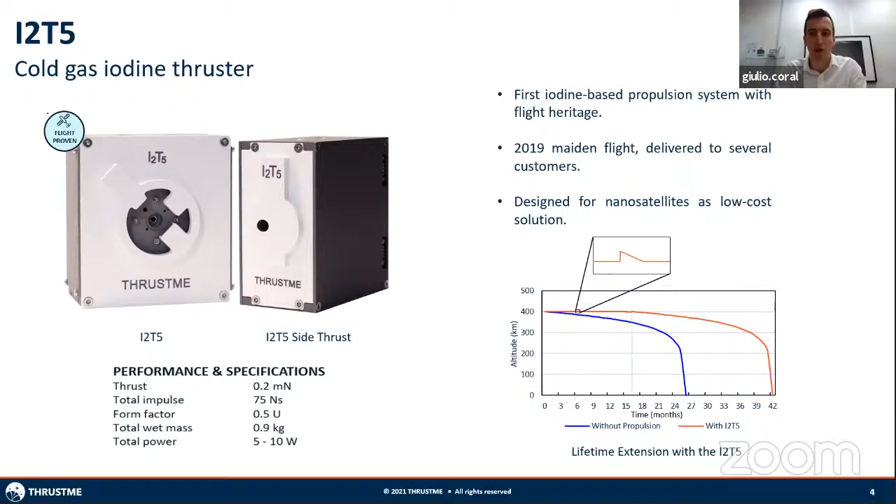You can see on the bottom right the difference between just leaving the satellite fall by itself and having a little bit of thrust from the I2T5. It extends the lifetime by several months.

Now, the product we are probably most famous for is the NPT30, specifically in the I2 version. This is an integrated gridded ion thruster system, meaning you have the ion thruster, the storage tank, and all the electronics in 1U or 1.5U. You just send the command to the thruster and it thrusts. This is also the first electric propulsion system using iodine ever demonstrated.

We've been flying a couple of them so far. Here's the performance—you can see we are on a totally different scale, several thousands of Newton-seconds. Depending on the version, it can be more or less, based on the tank.

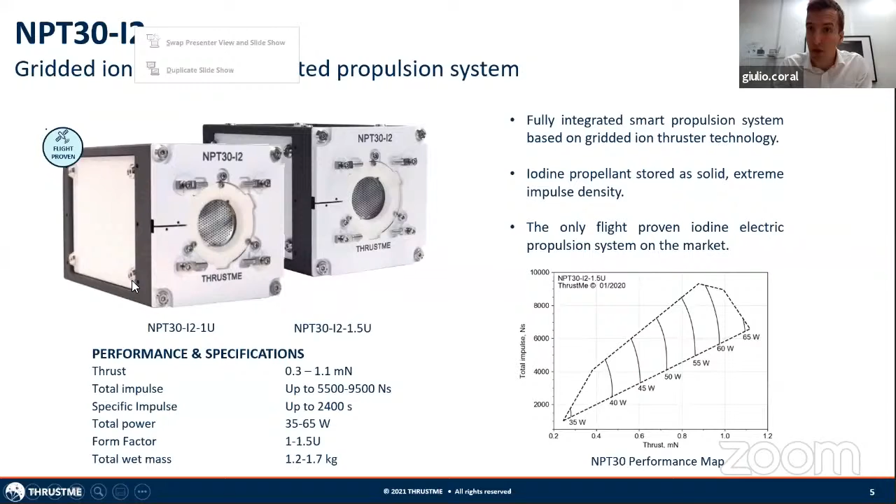This one offers especially—Jesus Christ, give me a second, I have the... there is some sort of automatic play. Okay, I'm going to try to fight the automatic play myself. One second, presenter view. I'm sorry, I'm going to try to get it to hold still. Okay.

So very high total impulse in a relatively compact format, which means even in a small volume you can deliver substantial performance. The performance curve is shown on the bottom right, so you can have different power levels and different combinations of thrust and total impulse.

This is one picture of the NPT30 operating on iodine. You may have often seen the beam of xenon, but iodine is a bit different—you have this yellow-colored ion beam that leaves the thruster. So yeah, the products we have flight-proven so far are the I2T5 and the NPT30 series.

You've probably seen in a previous presentation about the clustering of NPT30, which delivers higher thrust and total impulse for somewhat larger satellites. This one as well, ready and coming soon. A bit further down the future, the NPT300 series for small and medium satellites. So what I'm going to be talking about today is a new series of propulsion systems for advanced maneuvering capabilities, which can be used for a different series of maneuvers.

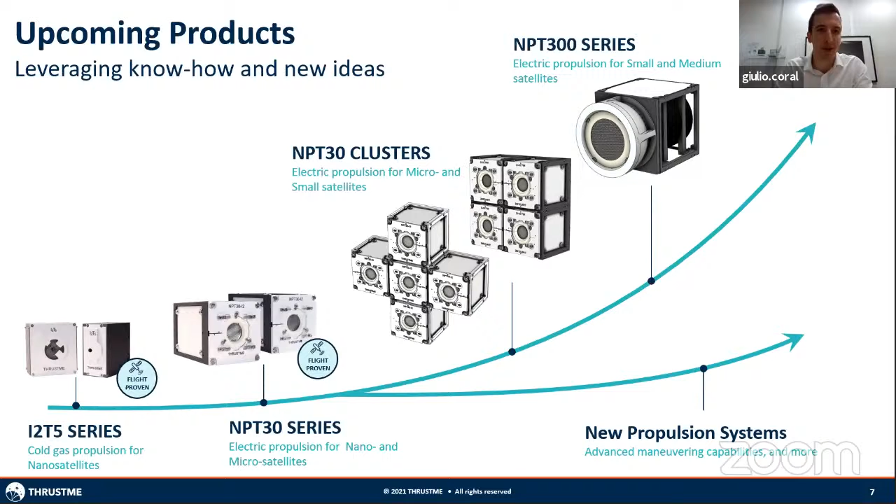Now, as the title suggested, we are going to be using water in this new project. So here is a bit of a comparison on why we like both iodine and water, although of course for different purposes.

Both of them can be stored unpressurized, iodine as solid and water as liquid. Both have high storage densities and can be delivered pre-filled to the customers. But iodine is very heavy, a very heavy atom, so it's great for electrostatic and electromagnetic thrusters. Water is a relatively light molecule, so it's great for electrothermal thrusters. It's basically about the way you accelerate it - you're probably familiar how it works. A lighter molecule delivers better performance for electrothermal thrusters. Better than this, there's of course hydrogen, but it has storage issues, let's say.

Now, how we go from a cold gas thruster to a hot steam thruster. Cold gas thruster is literally the most simple propulsion system one can imagine. You have a storage tank in which you normally have a pressurized gas, and a thruster. If you want to increase a bit the ISP, you add a resistor at the thruster, and if you want to prevent freezing trouble, you put a heater on the tank.

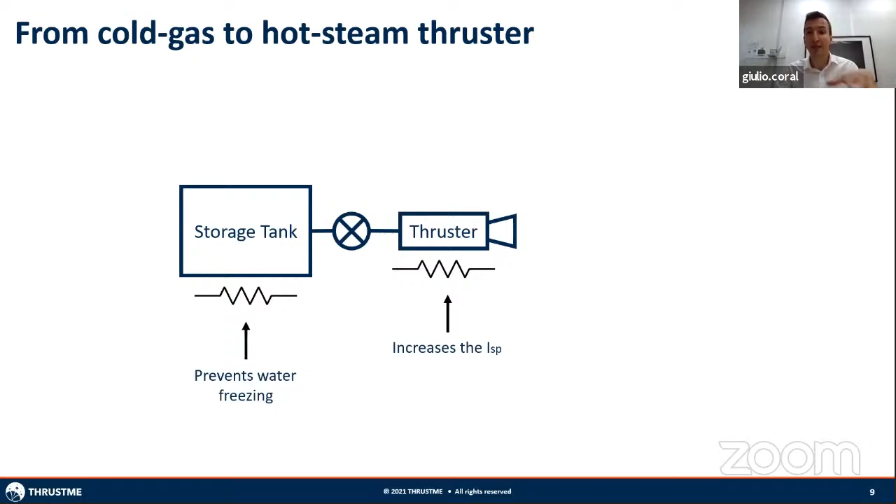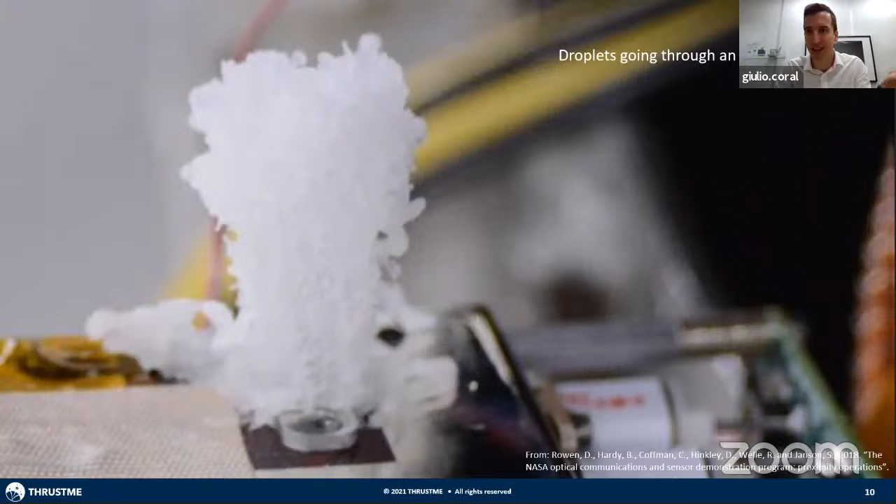Now, some people have tried to do this - it's been both at Surrey and at NASA. What happens if you just have a tank in which water is stored, and a thruster? You get droplets. So the thruster starts not only spraying water vapor, but also droplets. This reduces the ISP, plus droplets freeze because they go through a convergent-divergent nozzle, and by decreasing their temperature to increase the velocity, they freeze and form these ice cones. This caused several severe troubles, both for the Surrey mission and for the NASA one, in which they found that either they preload a lot less water, or they're going to have freezing, so they lose a lot of the propellant without generating any thrust.

Now, okay, we need to do a bit of modification to this because we've seen that approach doesn't work. So we add a separate storage tank in which we store water in a bladder, and then we inject a little bit of water in the vaporization tank. The water here is then vaporized, and then it's further heated in the thruster.

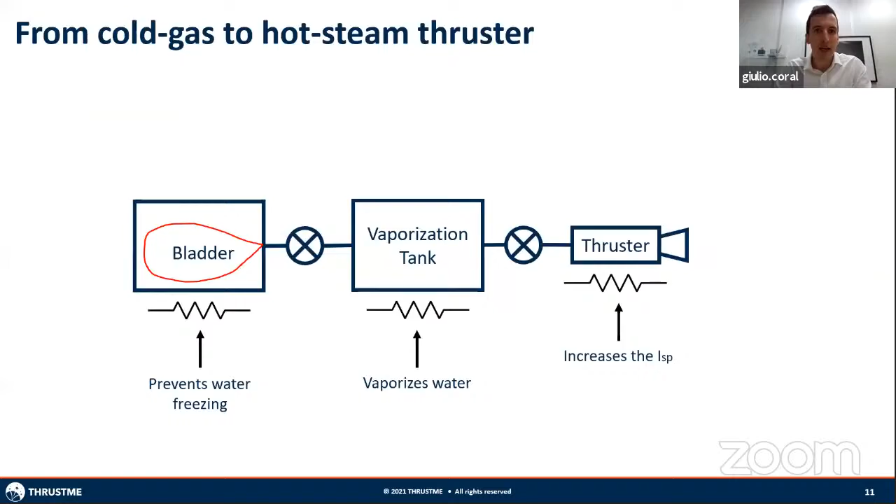So water vapor superheating is favorable for a series of reasons, but I'm going to talk about the ISP thrust-to-power ratio curve. This curve you are definitely familiar with is the relation between specific impulse and thrust-to-power ratio. We know the equation written here - the product between ISP and thrust-to-power ratio is fixed. So it gives us this curve, which means that in general, if I increase the temperature, I'm going to increase the specific impulse and reduce the thrust-to-power ratio.

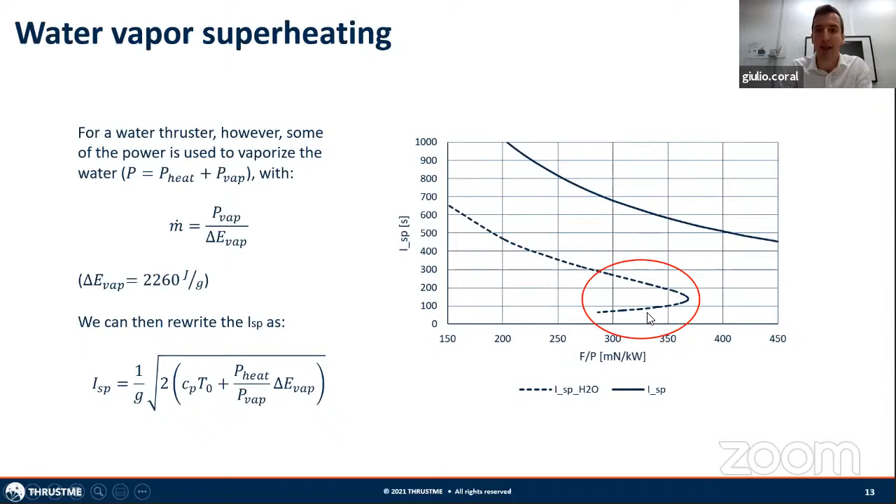For water propulsion systems, it's a bit different since not all the power goes into heating up the vapor - some of the power also goes into vaporizing the water from the beginning. So the mass flow here is determined by a portion of the power: m-dot equals P-vap over delta-E-vap, the vaporization energy. Now we can rewrite the ISP equation as this, and this leads us to this interesting curve, which shows that the general pattern for high temperatures is the same, but at low temperatures, if I increase the temperature, hence increasing the ISP, I also get a better thrust-to-power ratio.

This basically means that if I'm doing a water thruster, below 400 degrees, it's not even a trade-off. The higher the temperature, the better it is, no matter what. If I go above 400 degrees, I start losing thrust to power ratio, so at that point it becomes more of a standard electrothermal propulsion system.

Now we have this basic layout, we understand the fundamental theory. We want to start with the system design of this RCS system. We have a bladder vaporization tank and a set of thrusters. What we do here is study a schematic: how much space is each thruster going to take, how much space is each valve going to take, and how much space the vaporization tank is going to take.

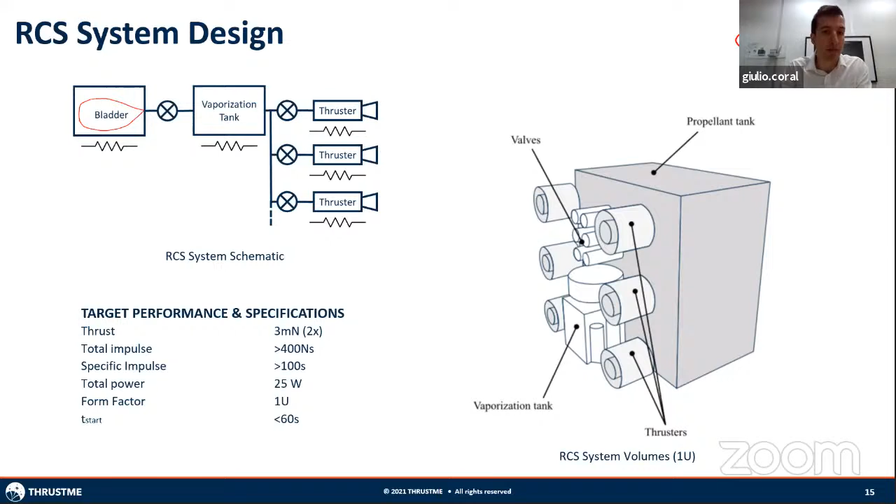We can have a rough idea with the ISP we are targeting from the theory of what performance we can get. Doing basic calculations with the previous theory and considering a typical power budget a new RCS system may have, we conclude we can deliver about 3 millinewtons of thrust per thruster with up to 2 firing at the same time. A total impulse in excess of 400 Newton seconds, delivered thanks to a specific impulse above 100 seconds, which is above anything there is in the industry for small nanosat RCS systems. This is provided with a total power of about 25 watts.

Now we have the system, let's start with the design of the thruster. What we're doing here is we put a heater at the center and then a channel typical for heating on the outside. The heater is a particularly high performance model that can hold very high temperatures, up to 10 watts on the single heater.

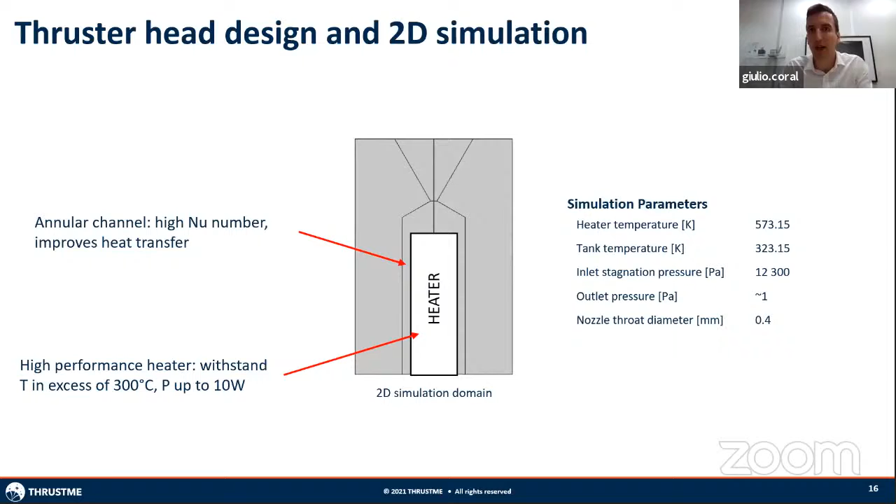The channel, we chose this layout - there are other options, but we chose the annular channel because of the high Nusselt numbers it delivers. We've been simulating it, starting with 2D simulations. The temperatures are shown on the right side. We start with the heater at 300 degrees and the inlet of water at 50 degrees Celsius.

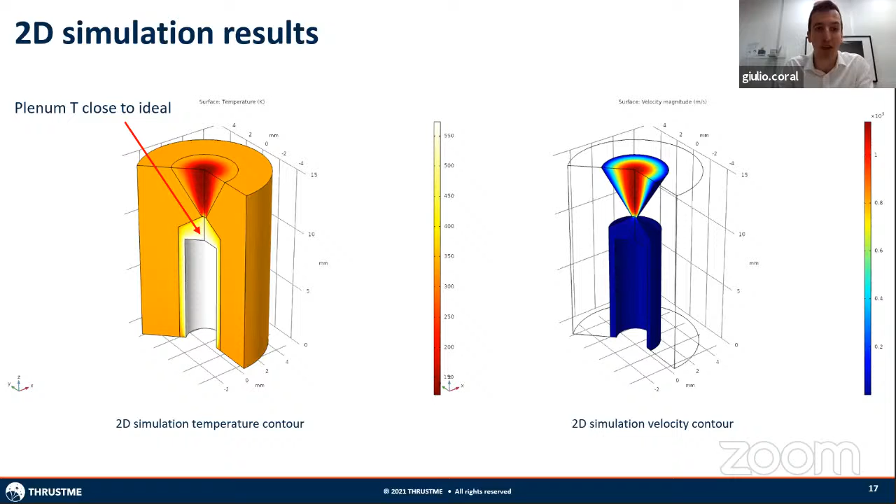An inlet stagnation pressure determined by the temperature of the water at the inlet of about 12 kilopascal. This is what we see, more or less. Here specifically, you can see the plenum temperature is very close to the ideal values. The Mach numbers are hard to see from this, but basically it means we can effectively heat water to the temperatures we are targeting.

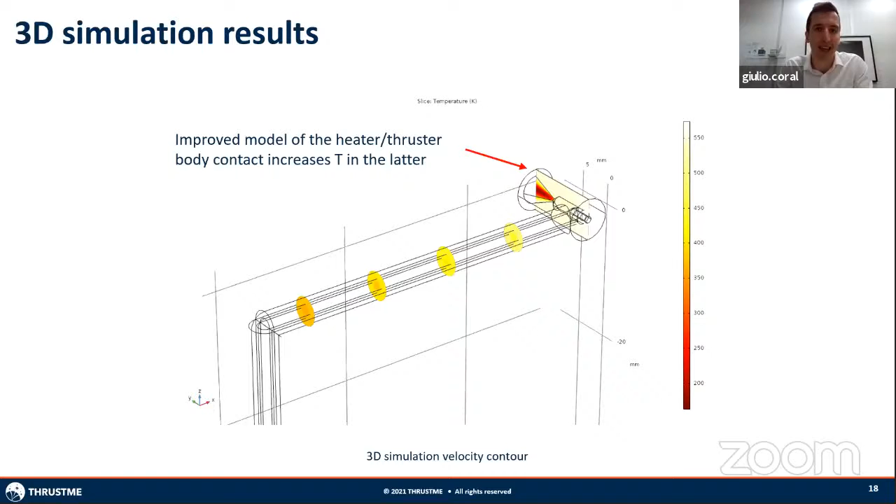A bit more in detail, we went on with 3D simulations. These have integrated the inlet pipe from which the water comes, and there's better contact modeling between the heater and the thruster. This shows that if we manage to hold the heater at 300 degrees Celsius, we can hold the water at the same temperature. So overall, the performance we've managed to simulate is very comparable to what the isentropic calculation, the basic theory I've shown before, gives us.

So overall, the conclusion from the 2D and 3D simulations is that an ISP in excess of 100 seconds is a realistic target. So we can deliver the performance we have studied before.

Now about water in the vaporization tank - how much water can I fit in the vaporization tank? If I just fit as much as I can with surface tension, putting a few droplets here and there, I'm not going to have droplets, but the thrust is going to go down very fast. The issue is the volume I can use is very limited, so the pressure depletes and the thrust starts going down, as you see in the bottom left figure.

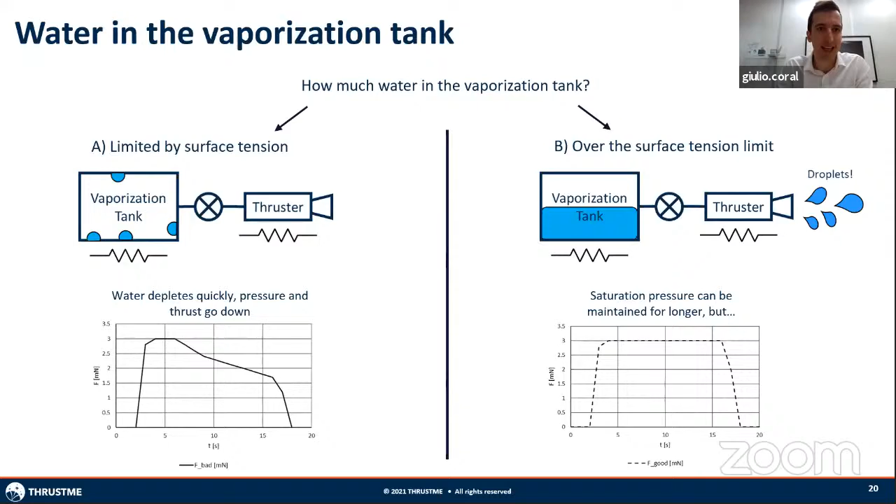If I fill more than the surface tension allows, I can in principle hold a nice thrust for a long time, but it's very likely I'm going to get droplets. Then the thrust is going to look like nothing like that - it's going to go crazy and then go to zero when the water freezes. So the solution we came up with is this, what we call an LSA, large surface area insert, which maximizes the amount of water I can store in the vaporization tank. Determining precisely how much water I can fit by simulation or analytically is kind of complicated.

So we decided to solve this with the bisection method. Basically, what we did is we placed the target in front of this, placed everything in the vacuum chamber, and started opening the valve to see if it releases droplets. And these are more or less the results: a series of tests starting with a lot of water, then a lot less, and then going by bisection.

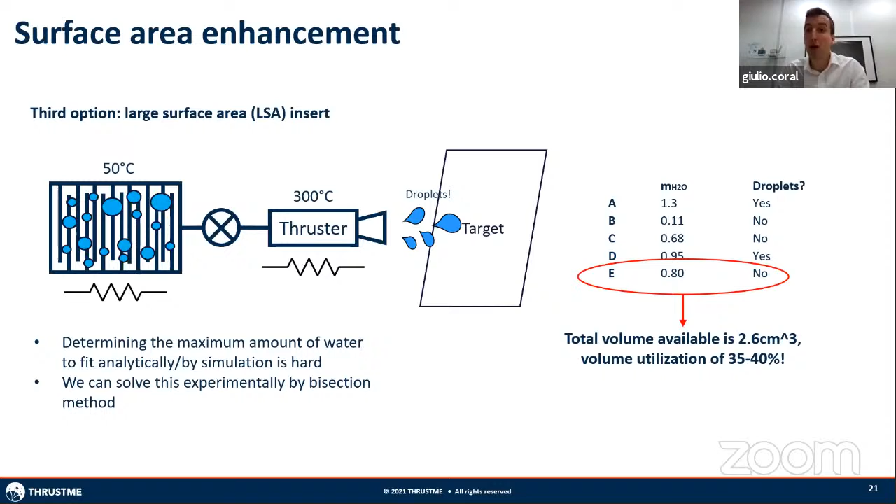We concluded that with about 35 to 40% of the volume filled with water, we can deliver zero droplets, which is then going to give us a stable thrust without losses due to the droplets themselves.

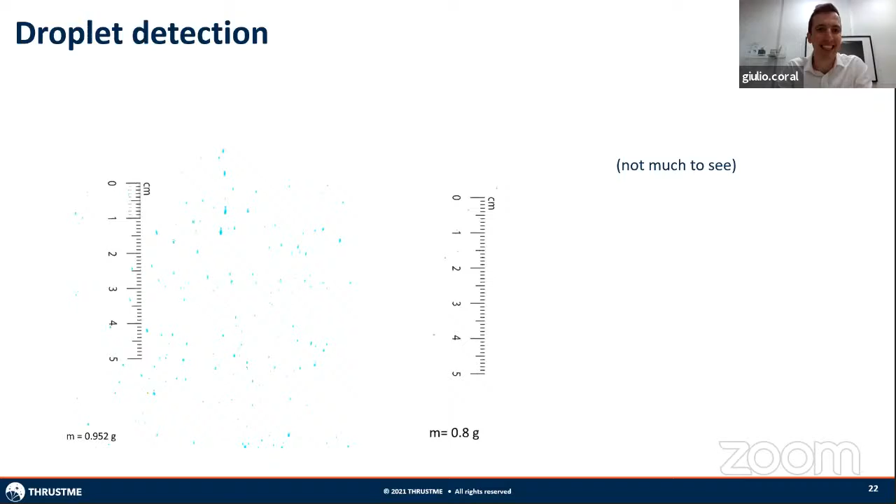Now, this is how we did the droplet detection. The target was basically a piece of paper which was then scanned. The water had some pigments which colored it blue. On the left side, you have one of the cases in which you have droplets, and you can clearly see them. On the right side, you have a case where no droplets are detected, and you cannot see that much. So next step, we need to minimize the heat losses.

This is particularly complex because the thrusters are at 300 degrees, while the vaporization tank is at 50. So the idea is using a bracket in which each thruster is mounted, which holds it to the vaporization chamber. So the little bit of heat I'm going to lose transfers to the vaporization chamber, which is then recycled to evaporate the liquid water, with no contact between the thrusters and the tank.

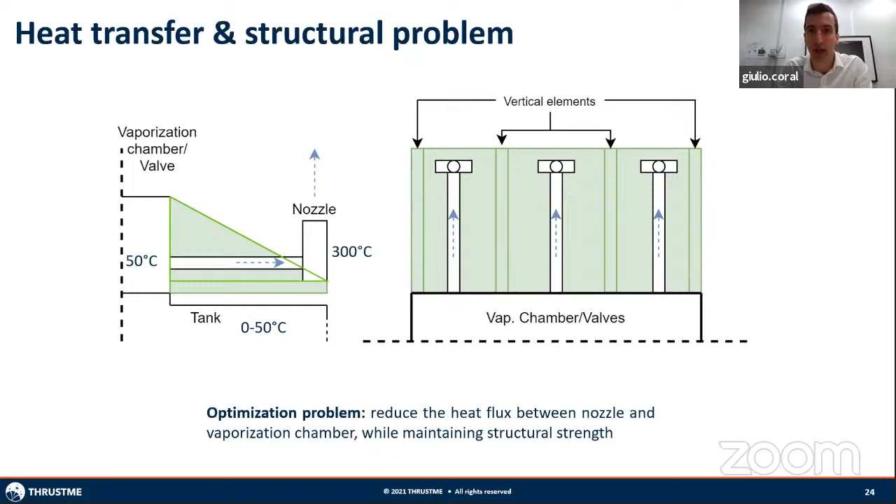Now this becomes an optimization problem. We want to reduce the heat flux between nozzle and vaporization chamber while maintaining sufficient structural strength, so the bracket and the whole system itself should survive the shocks and vibrations we see during launch. So we started with this design optimization process.

At the beginning, we tried to do it with kind of refined methods such as topology optimization or generative design, but it's somewhat complex from the point of view of introducing thermal conditions in these processes. So in the end, we started with this algorithm, done kind of by hand, starting with the fundamental drawings and then proceeding with little design iterations.

So in the end, for example, I can show you here on the left is the z-axis shock. This is the von Mises stresses on the bracket.

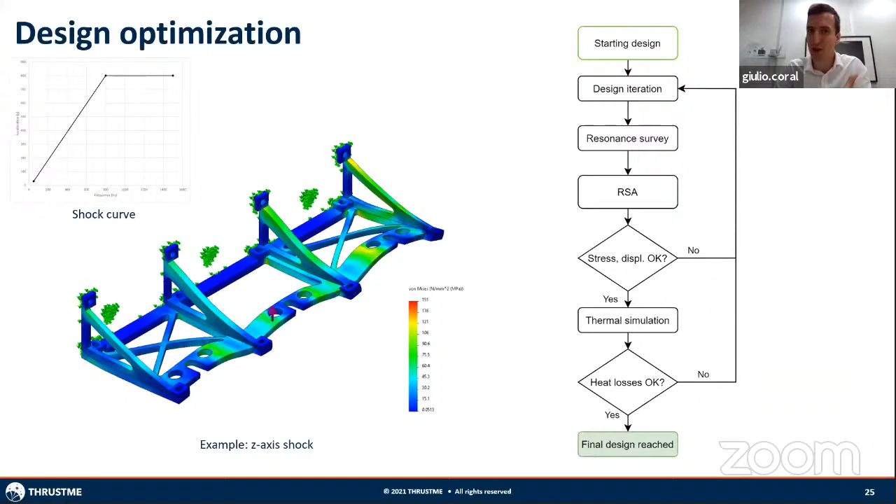You start by making a given design. You do the resonance survey for the shocks. You see if the stress is okay. Then, if it's okay, you do the thermal simulation. You see if the heat loss is okay. If any of this is not okay, you restart with a new design iteration until we get to a design that is satisfactory both for the thermal engineers and for the structural engineers.

So overall, I had to blank out the thrusters, but we end up with a design, as mentioned, that can have heat losses to the vaporization tank of less than 5 watts each side. We're going to have one of these brackets on each side, and it's designed to hold the shocks of launch, so no risk of structural failure.

Next, the thrust measurement experiment. On the top left, you can see more or less the measurement setup. We measure thrust, pressure, and temperature. We operate at the mentioned 50 degrees on the vaporization tank and 300 on the thruster, which gives us a 12.3 kilopascal vaporization pressure.

For this one specifically, we did a pulse duration of about 15 seconds with a duty cycle of 25%. On the top right, you can see the prototype. This is during a leak test, I believe, because during the thrust measurement, there was a bit too much stuff around.

On the bottom left, you can see we can deliver a greatly stable thrust. Over the single firing, the thrust is basically flat, which if you've seen comparable thrusters, they suffer a lot from this issue of the thrust going down very fast. The pressure drops a little during the thrust phase and then replenishes when we restart heating up.

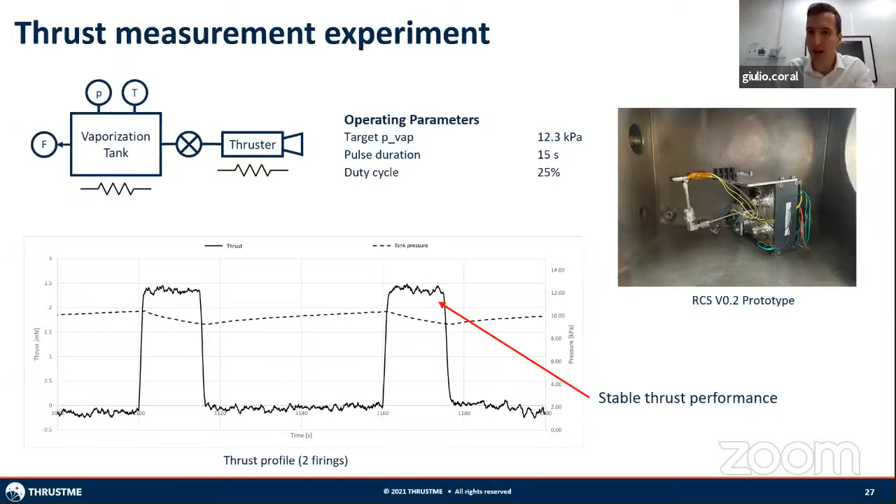But yeah, in general, stable thrust performance, which was one of our goals. This case specifically, we were running at about 2.5 millinewton, which as well is very close to the level we are targeting. The pressure, you can notice, is a bit lower than what we were targeting, and I'm explaining in the next slide what happened.

What's happening here is that yes, you heat up the tank, so you try to increase the pressure, but the temperature measured by the sensor may not be exactly the temperature of the water. It can be the temperature of certain parts, which overall means that you get a lower pressure. So the next step will be likely introducing a control loop on the pressure, which will guarantee us the exact thrust that we are targeting.

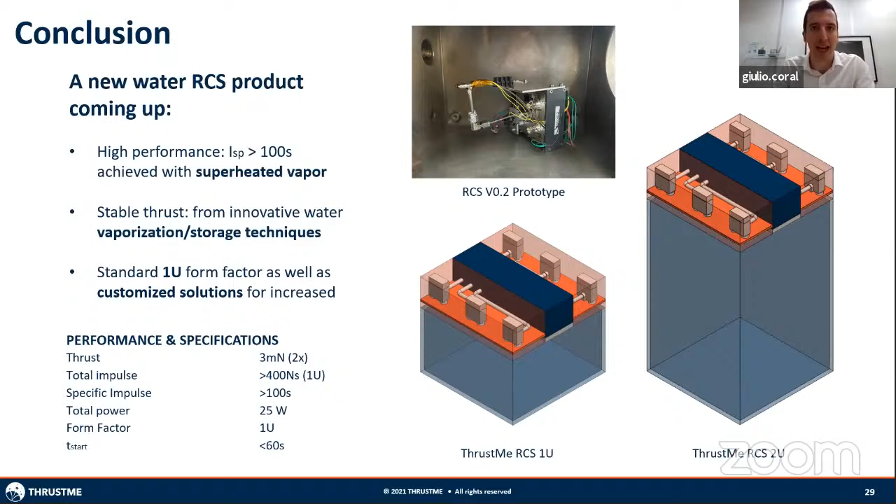Increasing the size, yeah, the tank, the storage, increasing the storage tank size is zero problem. Increasing the thrust can be as well done without major challenges, of course, depending on the interest of the customers.

I finished 5 minutes early, so thanks for your attention. And yeah, if you have any questions.

Thank you, Giulio, for this very interesting new concept of propulsion systems. So maybe now the paper is open for discussion. Yes. So maybe we can start with Stéphane.

Thank you, Laurent. Yeah, congrats, Giulio. This was really impressive, and I really like it, you know, because it started from theory until the product. This is really, really impressive. And congratulations to the whole ThrustMe team for this. Thank you. It's, yeah, exactly. It's a team effort, some of which are not mentioned. I must point out that there's a lot of people, especially the interns, who have worked on this, and they're not mentioned in the author list. So thanks to them, especially.

I have 2 questions, Giulio. The first one is about the iodine system. You know that Busek is also developing an iodine thruster, Hall effect thruster, and ion engine. Probably you know it. They never flew them. Busek, I'm not aware of them flying, or I'm aware that they are planning to fly, but I need to check the dates. I wouldn't even believe it's gonna happen this year. So yeah, from that point of view, we are still the only one who has flown.

For sure, you were the first, but I was wondering if other people have flown nowadays. The second one is about the water thruster. I don't really, from a customer viewpoint, although I'm not a customer, but what is exactly the advantage of this new water thruster compared to your cold gas thruster with iodine? Compared to the I2T5, yes. So overall, you've seen the I2T5 delivers 75 Newton seconds of total impulse. Of course, it's in half U, so we could in principle expand it.

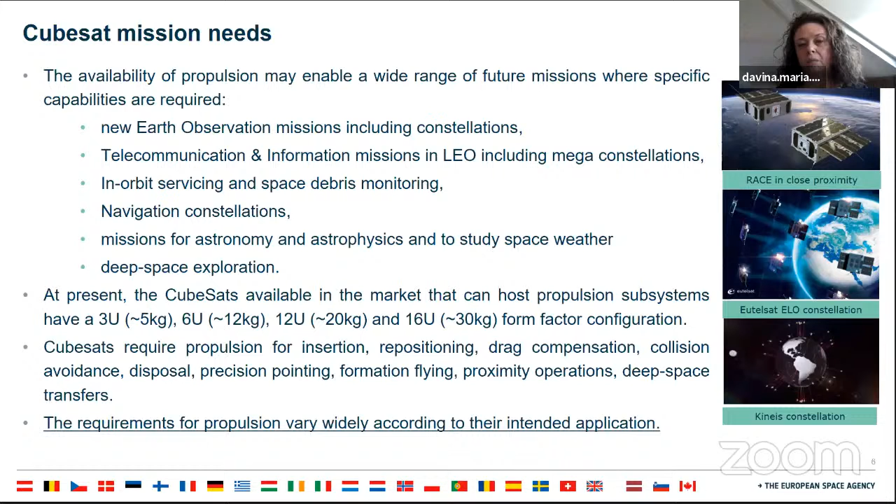We see CubeSats becoming bigger, as I said before. At the moment, we look up to 16U form factor, but this might change even in the future. And with all these different applications, there is no propulsion system that fits all, and the requirements really vary widely within the application according to the application.

We did a market study together with Euroconsult, and this is a bit of the outcome of that forecast: over 300 satellites with propulsion, with European propulsion, because this was targeting European product in the next 10 years. We see deorbiting and collision avoidance capability becoming a more and more hard requirement. And so in order to respond to that requirement, reliability is the word to keep in mind.

But we also see new missions coming, interplanetary. And for all that, we have identified that high delta V propulsion and 6 degrees of freedom propulsion is where we should really put attention on.

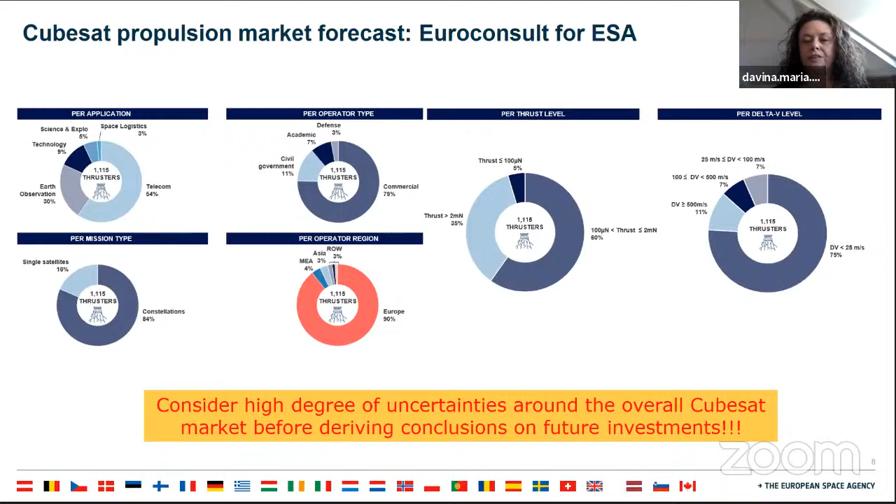This graph shows, again, one of the results of this study, which focused on the number of thrusters. But of course, I always keep saying we need to be very careful because this is a market assessment and the market is changing, it's got uncertainty. So, we see quite a lot of thrusters, and you can see there also the different thrust levels that will be required in the next 10 years.

Recently we are also including into this IOD mission set demonstrations of electric propulsion. I'll mention four of them which I think are quite interesting. One is M-ARGO. M-ARGO will be the first standalone deep space CubeSat that will rendezvous with a near Earth object, using a RIT 3.5 grid ion thruster from Mars Space to do the transfer to the near Earth object, but also a xenon-fed cold gas system, so it will be a hybrid system.

We have GOMX-5, which has got several experiments on board, including one of the iodine-fed NPT30 electric propulsion systems from ThrustMe to demonstrate large delta V in excess of 280 meters per second.

We have a lunar orbiter with FIP, which is also in definition phase. And we have another mission called Spectre, which at the moment has a trade-off open on electric propulsion, which plans to inspect large debris in LEO.

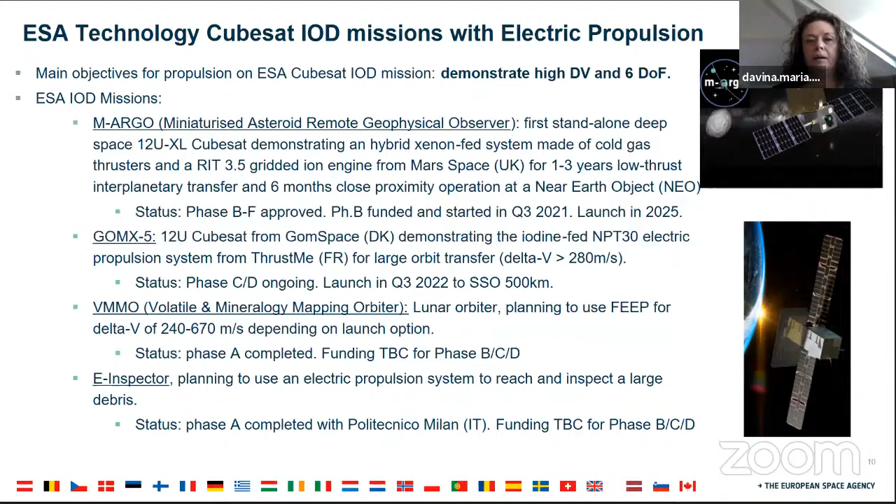At ESA, we also have several technology programs, and some of them are application driven. You can see there we have InCubed for Earth observation, CTP for science, ARTES for telecom, Expert for exploration, FLPP for launchers, and navigation is about to complete Egnos, but the new program is called NAVISP.

But then in my directorate, we have a technology development program which is independent from the application, so it spans all over the different applications, and they are divided into TDE and GSTP.

TDE, for those a bit more senior in the room who might remember the TRP in the past, has the objective to develop technologies which are at an early stage, so up to what we call a TRL maturity of 4 - breadboard prototype demonstrating in a representative environment. These are open calls, so you see ITTs coming out throughout the year with new requests for proposals to European industry and research centers.

And then we have GSTP, which are instead optional programs, and they take the products that are sometimes developed in TDE, sometimes developed through other means, but the objective is to take them to a high level of maturity, even into in-orbit demonstration with small satellites.

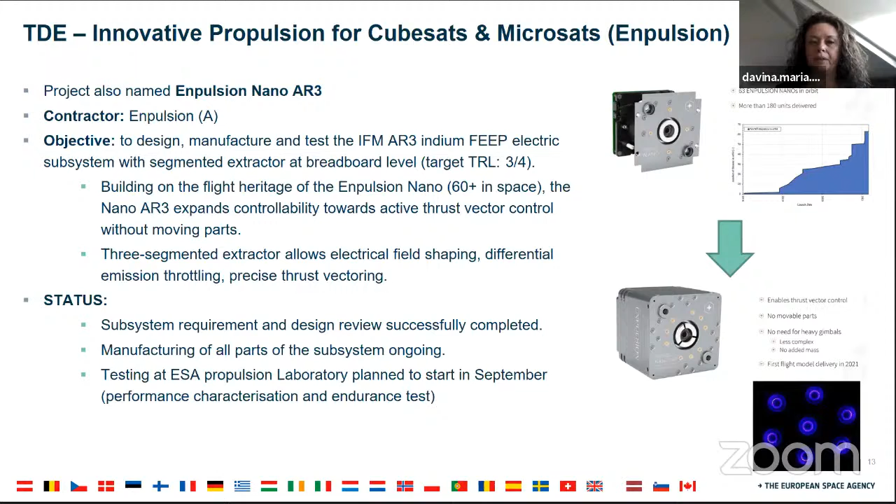T4I before has already completed the requirement and design definition, and they are at the moment in the prototyping phase. Enpulsion also, they are at the moment completing the assembly phase. In fact, the plan is that they're coming to ESTEC in the next two weeks for starting the test at our laboratory, and this involves performance characterization and endurance.

We also have a contract with ExoTrail that also targets upgrade of the nano system, which is also flight. The objective here is to extend the life by modifying some part of the thruster in order to extend the life up to 5 kNs. They are at the moment completing the design and definition phase, and as soon as they enter prototyping, they're planning to come to ESTEC for testing by the end of the year.

The final one we have also in parallel, so we have four electric propulsion activities in parallel, is with University of Southampton, and they are building the first all-printed VAT propulsion system. This is quite innovative, in my opinion, because everything is on a sticker, and I think there is a talk tomorrow about this more.

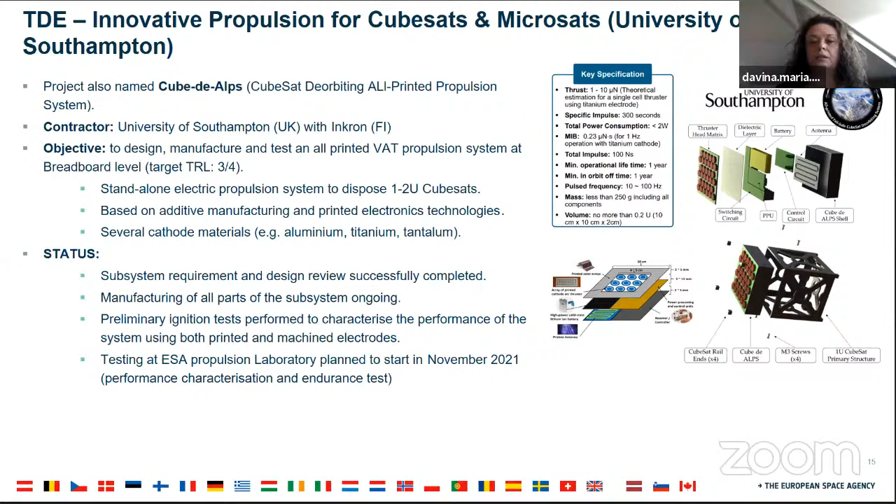So where we are also with this, we have completed the requirement definition phase. They are at the moment doing some tests at component level, and the plan is also that they're coming to ESTEC for performance characterization and endurance test by the end of this year.

We have several GSTP activities, this is more for higher, more mature development. The first one is with ExoTrail on the ExoMG microthruster, and this is involving the full qualification with a CDR planned already for beginning of next year. We also have a series of activities on the propulsion system for M-ARGO, on the development and qualification of the thruster, neutralizer, but also the entire propulsion system.

We also have an internal activity. This is targeting, for example, for what concerns the RIT, the validation of the life model, through tests like endurance test.

We are also running the harmonization process, and the harmonization on CubeSat propulsion is the first time we actually do it. And there is a reason, of course, because there is a lot of interest on this technology. The idea of the harmonization is to try to get an idea of the status of the technology in Europe in order to build the roadmap.

The harmonization of CubeSat propulsion includes chemical and electric propulsion systems for CubeSats up to 16U. We have put a target on the thrust level. Mainly this is really applicable to the chemical thruster, but we also include all the propulsion technology which does not follow the ECSS, but they are targeting missions where a bit higher risk is allowed.

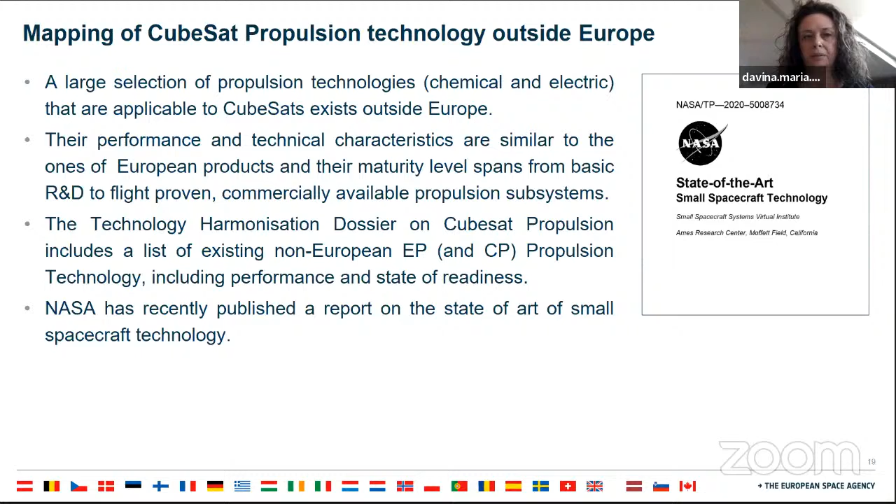We're also looking at the mapping outside Europe, and we've done a bit of research to understand how European technology fits into the worldwide market. In the meantime, also NASA, as perhaps most of you know, has released a document on the state of the art of technology, which I suggest everybody have a look at. It's available on the web.

So then you will see the roadmap when it is published, divided into different aims, as we call it, for an overall proposal of 72 new activities and a budget of almost 30 million. We have a standard at ESA, ECSS, but we also have a particular tailored version of the ECSS for CubeSat, in particular the ECSS-E engineering standard.

We work on a light approach for what concerns product and quality assurance, with emphasis on verification control, traceability, cleanliness, and risk mitigation.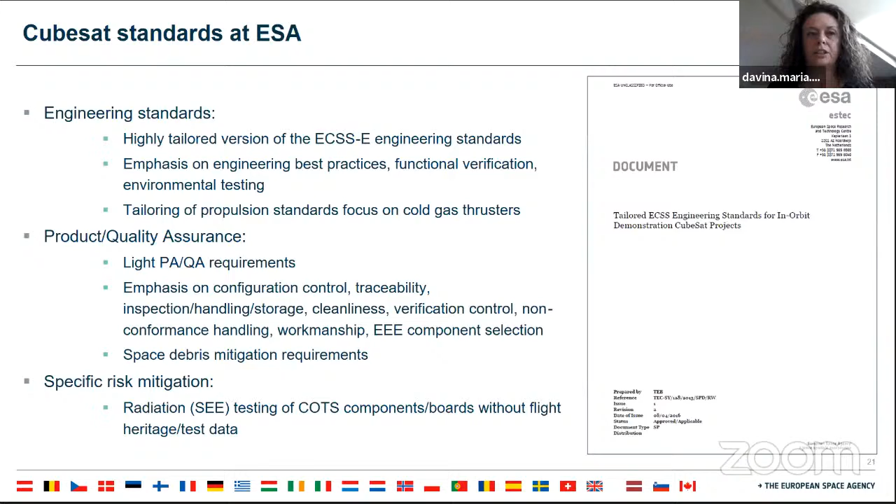But there is no specific standard for propulsion, as I say. So we have started working internally at ESA with a team of experts from chemical and electric propulsion, and started this exercise of tailoring existing propulsion standards: propulsion general, liquid electric propulsion for spacecraft, and testing.

We tried to reduce the number of requirements that you can see are quite impressive, but we're trying to reduce and tailor it to the application, whether it's a CubeSat meant for educational demonstration purpose or a commercial operational CubeSat. Keep in mind always that the technology targets low cost and fast time to market, but also considering the safety of the product.

We also started working on drafting a guideline and handbook, mainly for verification, trying to indicate the minimum level of verification that we believe are still important to carry out on ground. And with a list of minimum set of documents, we know ECSS can be quite heavy on documentation, so we tried to really stick to the minimum of what documents are necessary and what content of each document is necessary.

We also put there a bit of a trade-off on what to do. Endurance tests, life tests - this is a big question mark. We believe there are certain criteria listed that help deciding if an endurance test is sufficient or if a full life test is required. That depends on the qualification status, number and level of tests performed on ground, flight heritage, the maturity of the technology, if an accelerated test can be done, but also cost and programmatic aspects to be considered.

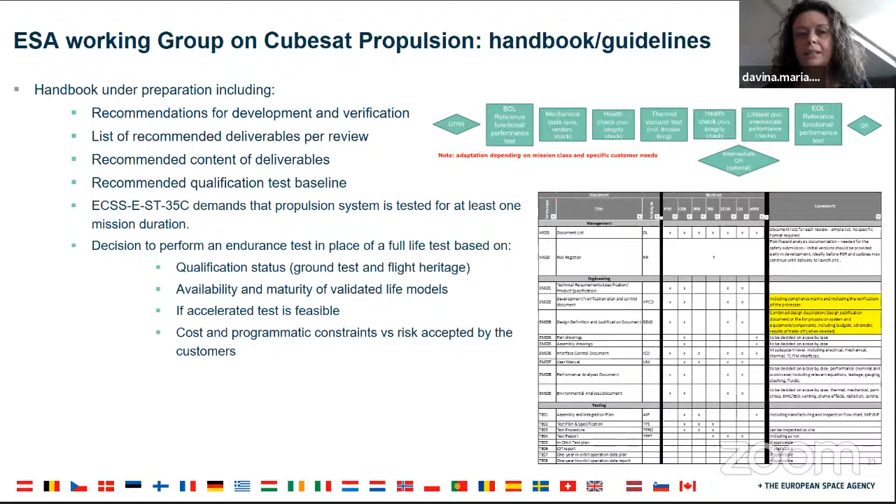Just very quickly on the plan that we have to upgrade the Davina, five minutes. Yes, five minutes please. I think I will be in the three minutes.

For those who don't know, we already have 7 chambers at ESTEC in the Netherlands. They are already suitable for testing CubeSat propulsion, perhaps not the one operating with iodine yet. So what we are doing now is we have submitted an internal plan to upgrade this laboratory with an incremental methodology, so we will deploy certain services in the next years.

The first would be to upgrade one of the facilities into TVT tests, so that we could perform an end-to-end test of the entire CubeSat satellite with the electric propulsion on board and the electric propulsion firing - the firing TVT test.

We have also planned to upgrade one facility to offer EMC/EMI test, because we believe this is quite important too, and also plan to upgrade the diagnostic and thrust measurement equipment in order to serve the market at the best. In the long term, we also look at perhaps including a solar simulator.

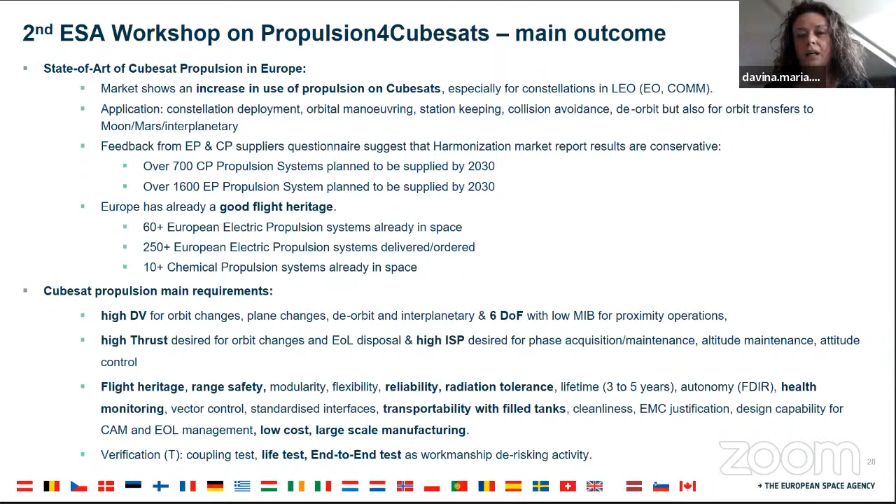We have highlighted the main requirements customers want: high delta V, 6 degrees of freedom, but also reliability. Safety is very important, and life tests and end-to-end tests are really considered important by the customer, as is workmanship and de-risking activity.

We asked a few questions during that workshop about whether the ECSS standards are still in use, and in fact the answer is yes. Companies still use ECSS, but they would like to have a dedicated one, and also a handbook. It is very welcome.

We also asked if our plan of building this test center at ESTEC is of interest for industry and research centers, and the answer was yes. The number shown there is not the number of people that voted, but the number of organizations - we try to only count one vote per affiliation. So it's really interesting to see that high number of companies responded yes to our question.

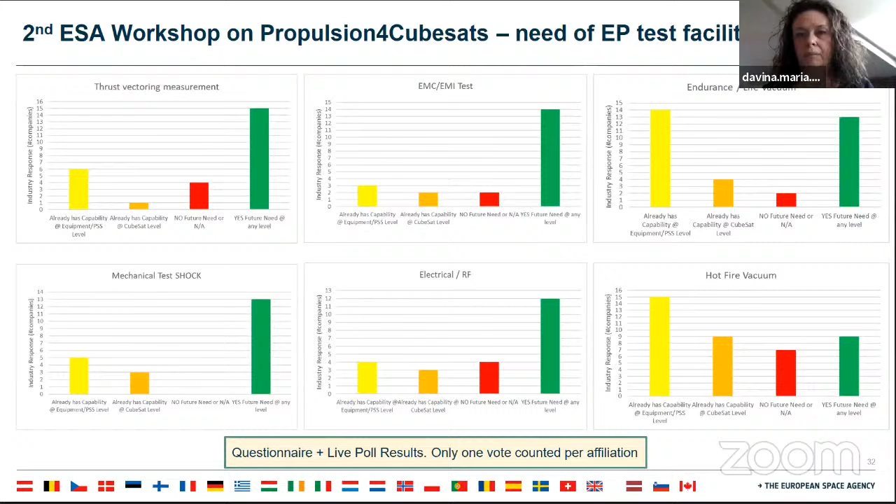And also this slide gives a bit of a view of what industry or research centers see needed for the future in terms of test capability. Thrust vectoring measurement, EMC/EMI test, endurance life test is the main interest.

With this, I conclude. I hope I gave you a bit of an overview of what is the ESA technology strategy and the ESA vision on CubeSat propulsion, and also a view of what we are working on in the frame of the harmonization process: the mapping, survey of the mission need, the market forecast, and roadmap. Also showed you some of the IOD missions with electric propulsion - I only included the ones with electric propulsion - and gave you some information on the running activity we are doing, and on the result of the working group on the ECSS engineering, tailoring and guideline, and a bit of the conclusion of the workshop that we had early this year.

So at the moment, after assessing all the propulsion systems for CubeSat, and after discussing with national agencies and industry through workshops, conferences, and also direct contact, we are working on the creation of an independent test center for CubeSat propulsion within the ESA Propulsion Laboratory. And I think I can conclude here, and I'll take any questions.

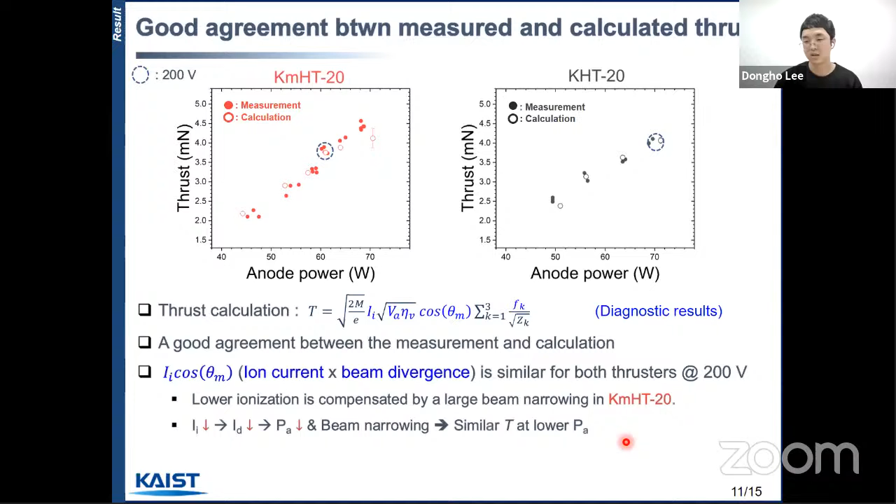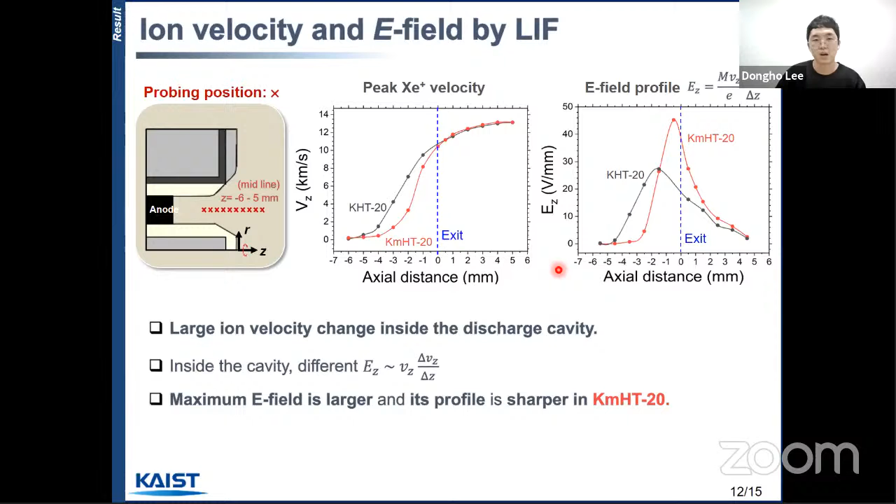This kind of dark gap is also found in several magnetically shielded Hall thrusters before, so we believe this is a similar phenomenon here.

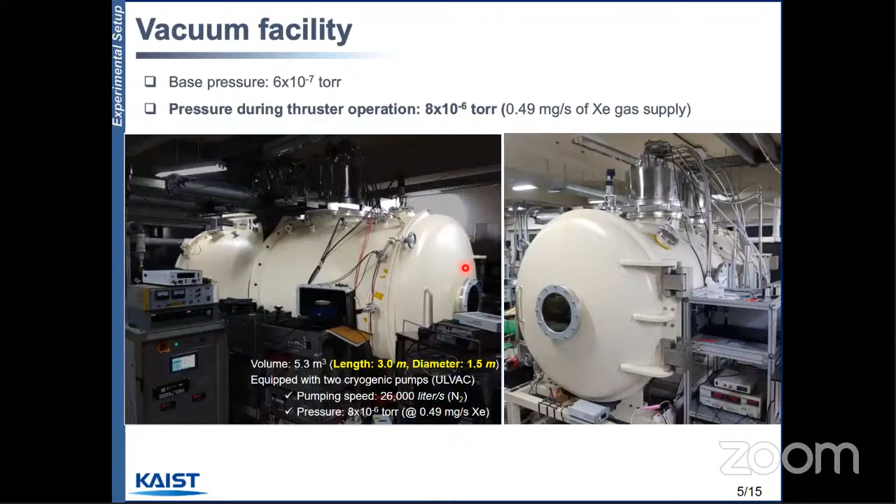I see you have some simulation from your group presented the next day. Do you have any insights from the simulation that you can share now?

Yes, actually we have studied this kind of mode change and what really happens during the mode change in our first paper. Consequently, we found a large localization of acceleration and ionization during this mode change, along with large beam narrowing and electron confinement. So we do not have concrete numerical evidence yet, but we think these differences in acceleration profiles led to the large enhancement of thrust.

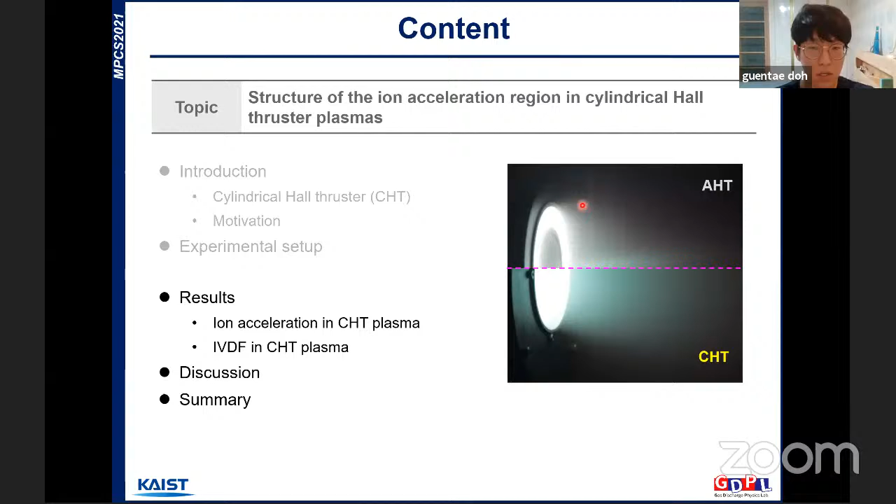Now let's see the results.

This figure highlights the different ion acceleration between AHT and CHT, shown here as an ion energy profile. As other studies have shown, AHT showed a narrow ion acceleration region about 10 millimeters near the channel exit. But CHT showed that the ion acceleration front stays at minus 15 millimeters, very deep inside, and saturates at about 70 millimeters outside the discharge channel. So the ion acceleration region is significantly extended in CHT plasmas.

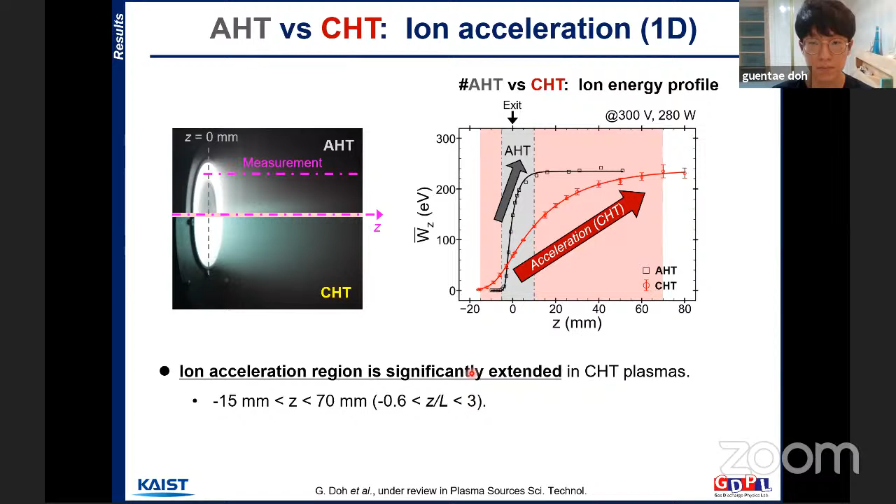This is the 2D IVDF measurement in CHT plasma. Squares are measured points; the color map indicates the summation of axial energy and radial energy. Arrows are ion velocity vectors, and yellow dashed curves illustrate the ion trajectories. We can see that as the radial position increases, the ion divergence also increases.

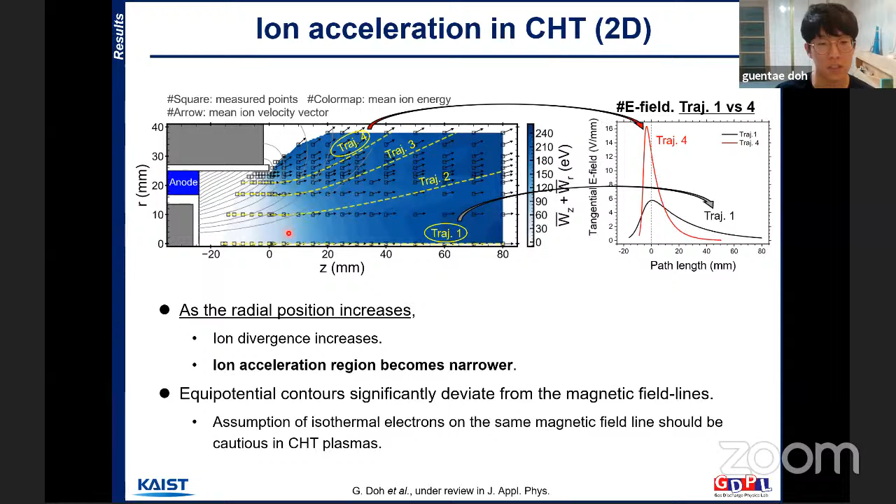From now on, I will talk about the IVDF at different axial positions. We can see that inside the discharge channel, the IVDF can be represented as a single Gaussian function, but during acceleration it becomes significantly asymmetric and can be represented as a double Gaussian function. This double Gaussian worked very well at other positions, so we suggest a fast and slow ion group in CHT plasma.

This is the fraction of slow and fast ion groups, indicating the area in the IVDF, and this is the ion temperature of the two groups. We can see that the fraction and ion temperature of the fast group significantly increase in this gray shaded region, and this corresponds to the region where the ion energy increase is very large. So we think the cause of this asymmetry should be significant in this region.

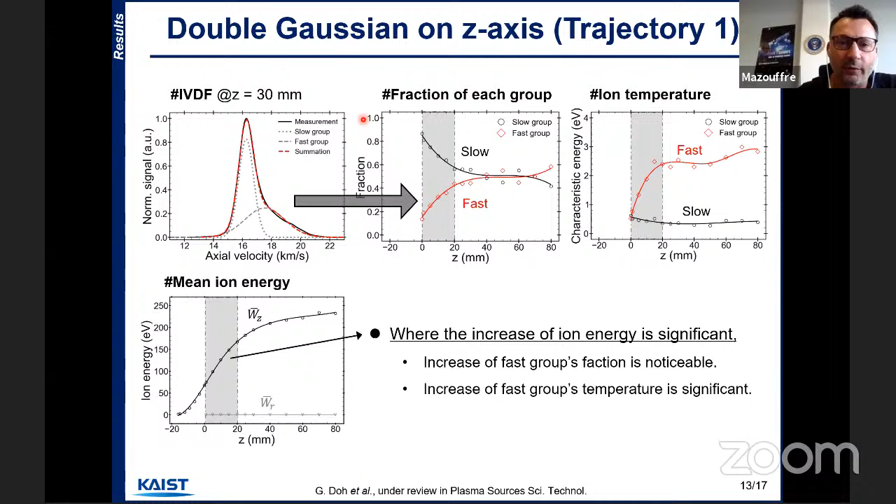Yeah, well, I'm not sure about this. I can just suggest possible candidates. I think one thing is about the 100 kilohertz ionic instability, because some PIC simulations showed that very low velocity ions occur due to that instability. I also think that charge exchange collisions could be the reason why these appear.

And in your explanation just before the conclusion, you were mentioning two possibilities or explanations: ion transit time oscillation and two-stream instability. Do you know how we could experimentally distinguish between the two possibilities? Is there a way to really distinguish between the two and better understand which one is at the origin of the distribution function you see?

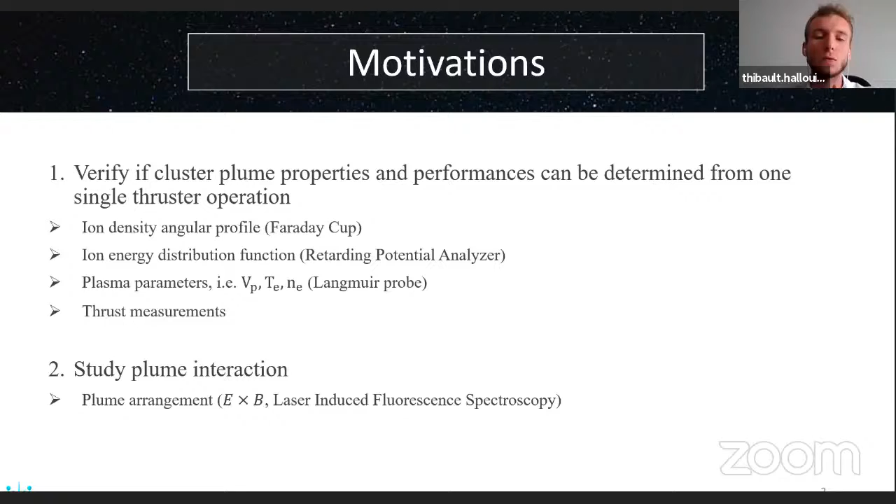So for now in this presentation, I will present you the experimental setup, but also the two diagnostics, basically the Faraday cup and the retarding potential analyzer, which give good information concerning the total ion current and the ion energy distribution function.

Concerning the thruster that was used, it's an experimental model, the ISCT 100 V2 developed here in the ICARE laboratory. It's an experimental model, so there are some differences with a flight model. Basically, the gas injector is a ceramic, made of mullite, a porous ceramic. The anode is just a ring in the discharge channel, and the magnetic field is generated by permanent magnets. The channel wall material is made of BN-SiO2.

Xenon was used as propellant gas for both the cathode and the anodes. An external 1-ampere class LaB6 hollow cathode was used. At the beginning, we were supposed to use 1 cathode per anode block, but the problem is that we had some trouble with one of these cathodes, so we didn't have the choice but to use only 1 cathode shared for the 2 anode blocks. Concerning the cathode, the CRP was kept around -10 volts by keeping a constant heating power on it, so that we limit the influence of the cathode operation on the plasma plume properties.

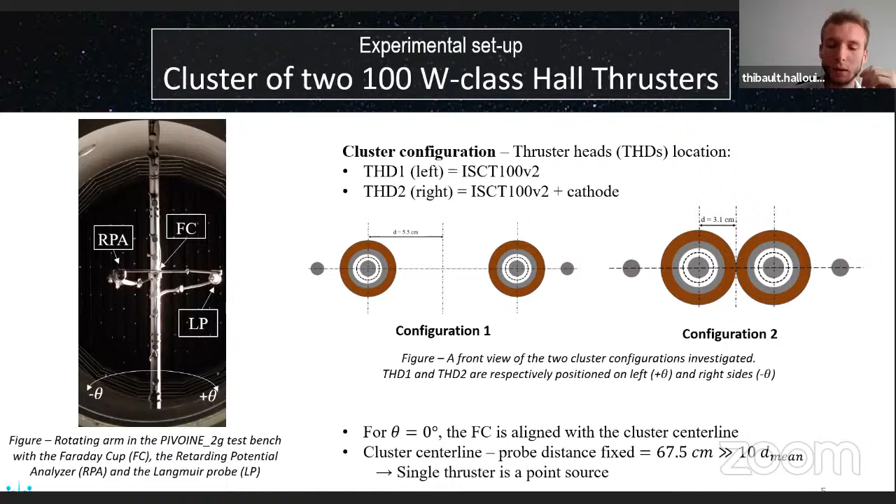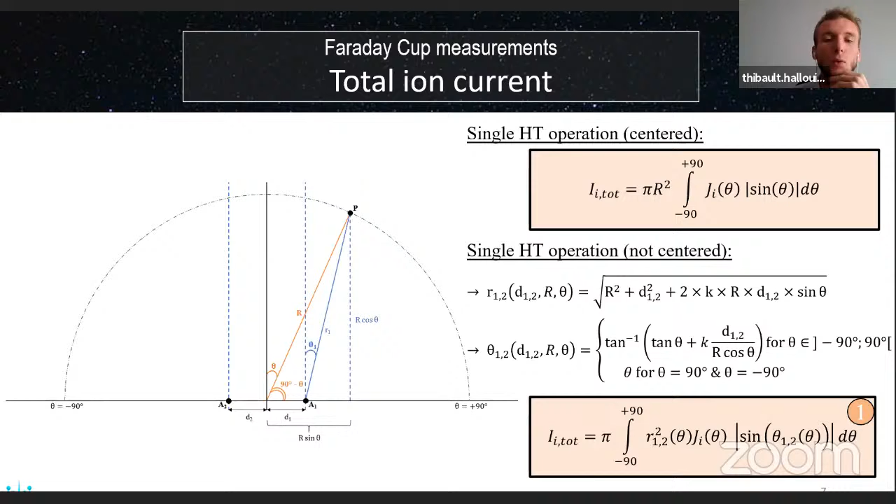From this plot, we can compute the total ion current. This is the formula we apply for a single Hall thruster operation centered with the Faraday cup at the 0 degree position. But here we are not aligned at the 0 degree position, so we have to take that into account. We apply Formula 1, which accounts for the fact that the distance between the anode and the Faraday cup varies with the angle, using some trigonometric tricks. This concerns the computation of a single Hall thruster operation when it is not centered.

To compute the total ion current for a cluster operation, we cannot apply the previous formula directly. We have to adapt it, because in a cluster operation, when you collect current in the Faraday cup, you don't know which source in the plasma it comes from, since two thrusters are operating at the same time. The only way to account for this is to apply a correction factor, which takes into account that the distance between the Faraday cup and each anode block varies with the angular position. I will call this Formula 2.

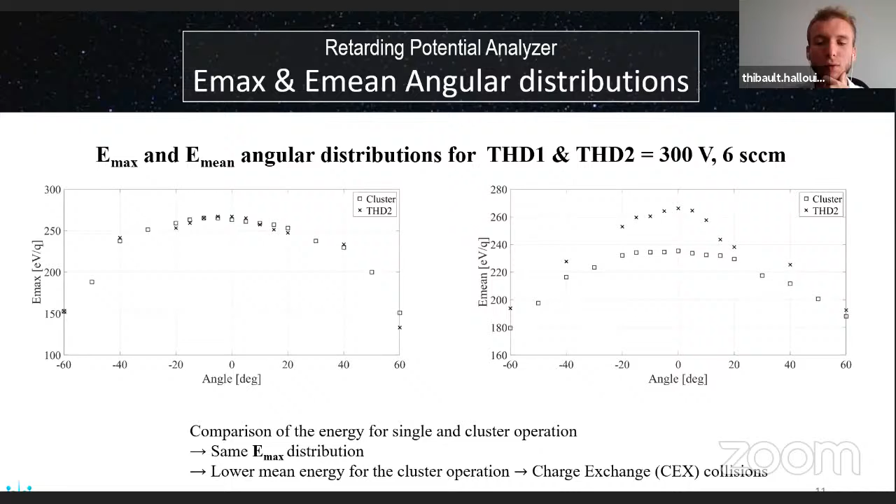Just one more minute. Conclusions: so we had some interesting results. We were able to compare single thruster operation and cluster operation.

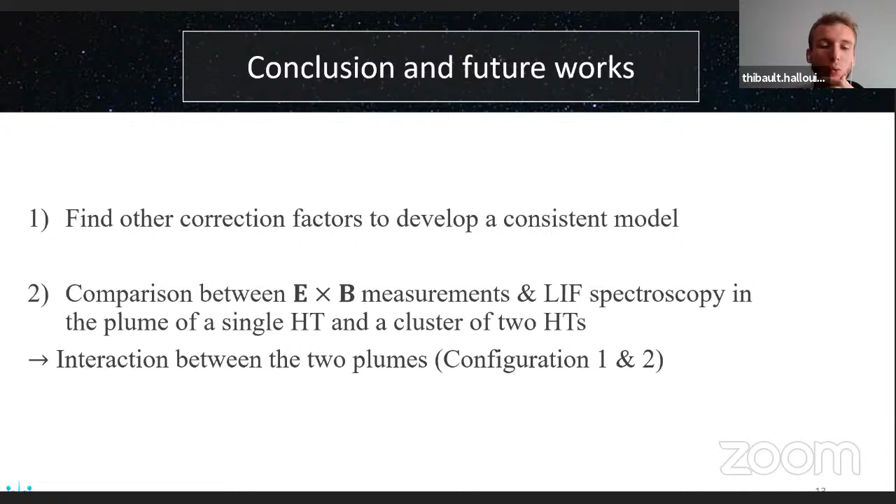And also in the future, E-cross-B probe measurements were already made, but we would like also to make some LIF spectroscopy so that we can better understand the interaction between the two plumes. So thank you for your attention, and if you have some questions, I'd be glad to answer them.

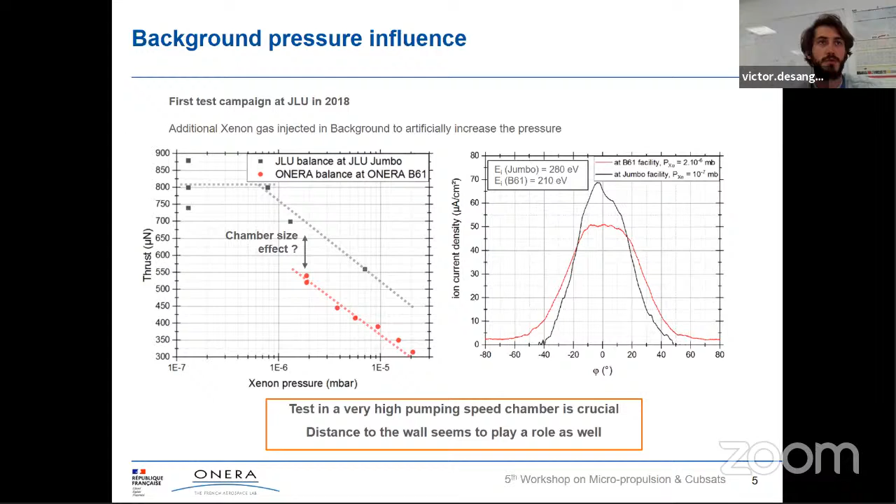Why are the performances decreasing with the pressure? We've measured all the different figures that allow us to compute the thrust, so the ion current density, angular distribution, as well as the ion energy, all increase when we decrease the pressure. So having a very good background pressure is very necessary to measure the good performances with these ECR thrusters.

The first job we did during the H2020 project was to optimize the thruster geometry and design. We did repetitive measurements, changing the length and diameter of both the outer conductor and the inner conductor. What we ended up selecting is an outer conductor that is 20 millimeters long, an inner conductor that is also 20 millimeters long, with a diameter of 2.3 millimeters. The outer conductor has a diameter of 27 millimeters.

There is also a certain type of optimization we did on the material of both conductors and on the coating. I will not focus my presentation on this today, but you need to keep in mind that this material and coating are also very important to access very good performances.

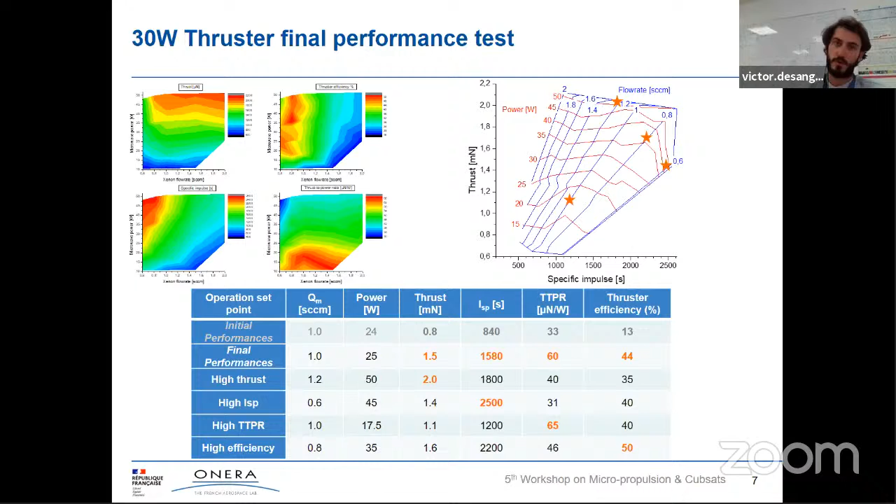By changing the mass flow rate and power, you can make compromises to choose higher thrust, higher ISP, or higher thrust-to-power ratio, and select which working regime you want the thruster to operate in. Based on this conclusion, we decided, as it was a goal at the beginning of the project, to develop a bigger thruster.

We aimed at 200 watts. What we decided was to keep the power to area ratio in the backplate constant, going from the 30 watt to the 200 watt version. This 200 watt version now has a diameter of 70 millimeters, so it's a bigger thruster. We also had to design a new permanent magnet to fit this new dimension.

We then tested this 200 watt thruster in the jumbo vacuum chamber, and interestingly, we obtained quite similar figures to the 30 watt thruster. We have a similar ISP of about 2,800 seconds, a similar thrust-to-power ratio—we can go over 60—and roughly the same total thrust efficiency, about 50% at maximum.

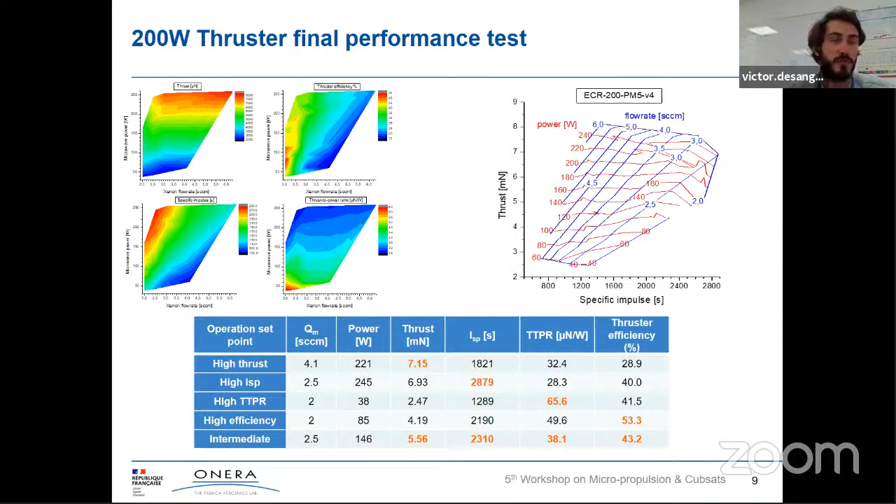The thrust is in fact higher; we can go up to 7 millinewtons. Here I've chosen to show an intermediate point that's kind of a compromise between all these figures. What's interesting is that this compromise occurs at 150 watts, even though we were targeting 200 watts. So there's a scaling law we don't capture for the moment for these thrusters, but it will be interesting to investigate in the future.

The last test we did at JLU was a short endurance test, I'll call it. We looked at the performance stability of the 200 watt thruster over 100 hours of continuous operation. What you see in the top plot is that the thruster operates at constant thrust for these 100 hours. I'd like to highlight that we stopped the test because the vacuum chamber was no longer available after those 100 hours.

But the thruster was still operating very fine, so we could have kept going with this test for a much longer time. We also checked the erosion of the inner conductor, because it's the part of the thruster that erodes the most, and you can see it by eye when you run the thruster for a long time.

What we've noticed is that, first of all, the loss of mass of this inner conductor is linear with time. We measured the rate of 0.2 milligrams per hour for the 30 watt thruster and 0.06 milligrams per hour for the 200 watt thruster, so 3 times less.

This leads us to compute an estimated lifetime based on the disappearance of half of the mass of the inner conductor. This gives us about 500 hours for the 30 watt thruster and 1,700 hours for the 200 watt thruster. We are quite happy with those figures for the moment.

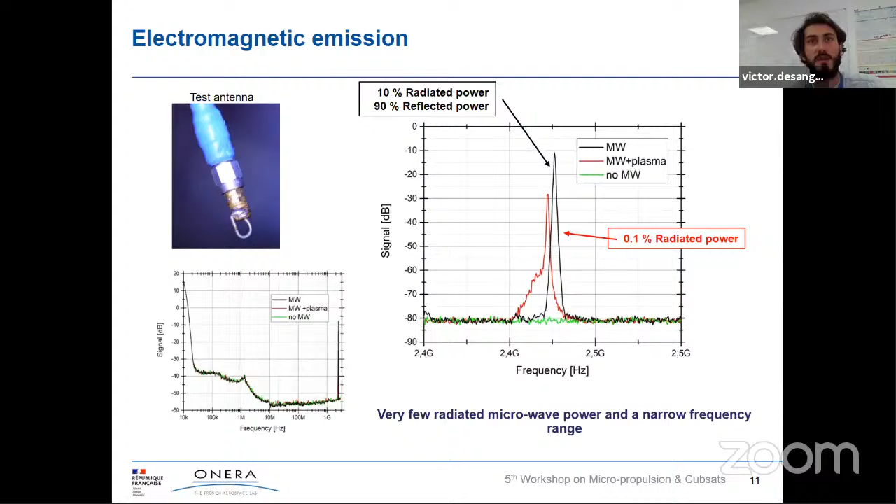We have also made a proof of concept of magnetically driven thrust vectoring, and we achieved for the first prototype that we've made plus and minus 3 degrees for 15 watts of consumption for this prototype. I will now conclude this presentation.

First of all, we were very happy with the new performances of the thrusters, with the development of the 2 prototypes, and by the fact that we have demonstrated that the thruster can work steadily for 100 hours.

I would also like to say a word about what has been done by the other partners, because they did a really good job. TMI developed a microwave generator that is adapted to the 30 watt thruster. It can develop 22 watts with an efficiency of 72%, and it's a very small microwave generator, about 0.2 liters for a couple hundred grams.

Safran and Thales Belgium also looked at the impact of the ECR technology on mission costs. One of their findings is that the simplification brought by the ECR thruster compared to old technology for the PPU leads us to think that the PPU may have its cost reduced by something like 50%, so it's quite a lot.

The last thing I want to mention is the development of numerical simulation tools by our colleagues at UC3M. They have developed a hybrid code that is very much adapted to the simulation of our ECR thruster, and they've already published those results. We are now working on a very detailed comparison between experimental and numerical data, hoping for publication in a short time.

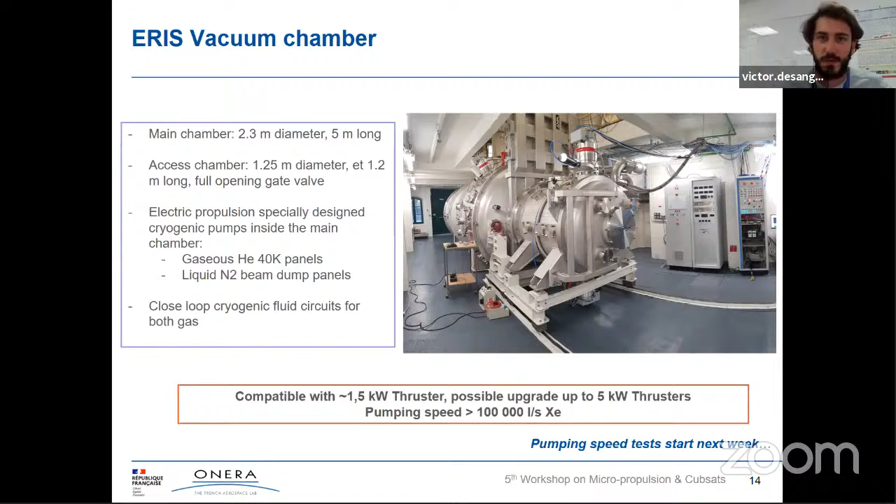Thanks a lot, Victor. It was really great to have an overview of this MINOTOR H2020 project. I must admit that the numbers are super impressive. Thrust efficiency at such a low power, that's really very interesting and certainly promising technology.

There are questions from the audience. I just want to ask one myself, and since I'm chairman, I can do it. Are you thinking about delivering a product at the end?

Yeah, of course, that is not what we are used to do at Onera. We are more working on doing science and development research, so we are coming onto it. We will see what we can do in the near future. We want to focus on validating what we can do on the pairing of the generator on this thruster, because this is not something usually done at this frequency. Then I think we can have a better view of whether this product can be industrialized very soon, or if we need a lot more work to do. So yeah, we are going into this.

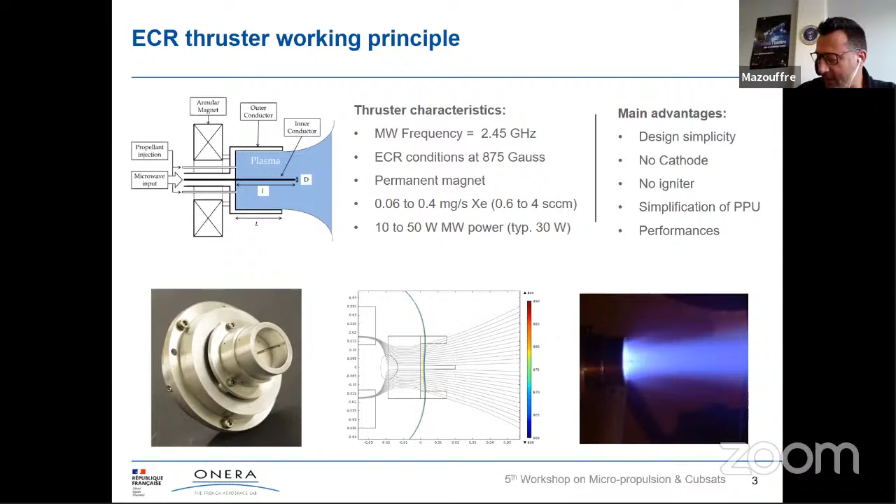Yeah, one second, I have a problem with the video. Okay, we have time because it's the break afterwards. Okay, I have it. Okay, I can start sharing. Yes, you can, can you see? Yes, just have to enlarge it and it's fine. So you've got 15 minutes, Marco, and we have 5 minutes of questions afterwards.

Okay, so thank you for the introduction. Today I'm going to talk about the first efforts in the first experimental campaign on the newly designed circular waveguide of the EP2 group. This short presentation will be organized as follows: we will have a short introduction, a description of the ECR thruster and the experimental setup, the results, and the conclusions.

Starting with the introduction: this work is part of the Prometeo project, a mutual collaboration between the CIEMAT National Fusion Laboratory and the EP2 group. In this context, we developed a waveguide ECR thruster prototype, because it has been shown during the H2020 MINOTOR project to be a promising candidate for in-space propulsion, like we saw in the last presentation.

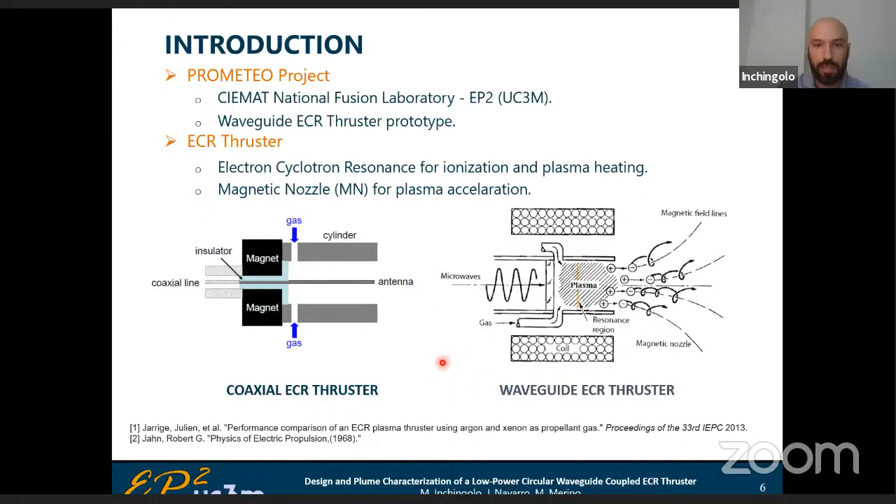Our team is tackling this problem from both the simulation and experimental point of view, but for this conference we are going to talk about only the experimental part. These are the latest results that we obtained, and indeed we were able to achieve the first ignition and perform some preliminary characterization of this prototype. Okay, so now I can describe the thruster a bit.

One of the main disadvantages when you switch to the waveguide configuration is that now the thruster dimensions are dependent on the microwave frequency. For this reason, we decided to use a 5.8 gigahertz source in order to limit the dimensions and the power requirement.

Furthermore, the thruster has been designed as a breadboard in order to be able to actively change all the components in the design. This is eased by the fact that the magnetic field generator is completely separated from the thruster. The magnetic field generator is composed of two elements.

We have a radially magnetized ring magnet made of samarium cobalt, and the coil, which creates the field necessary for the resonance and also determines the shape of the magnetic nozzle. But we can use the coil to affect this magnetic field topology.

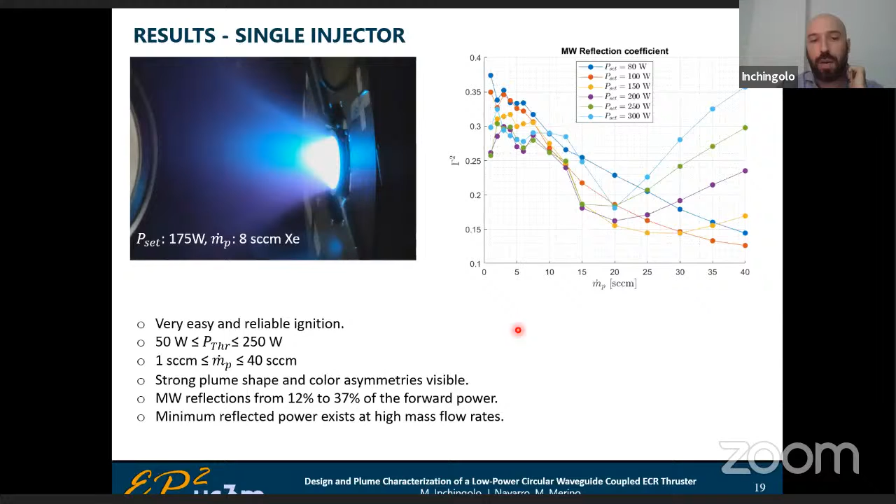What I want to show here is that the reflections, the microwave reflection that we experienced during this campaign, were quite high. In particular, for the single injector configuration, we can see that they reach up to 37%, and this creates problems in the measurement of the power delivered to the thruster, because it increases the error.

In any case, we see that going to higher mass flow rates generally reduces the reflection, and this minimum of reflection displaces towards lower mass flow rates when the power is increased, as we can see here.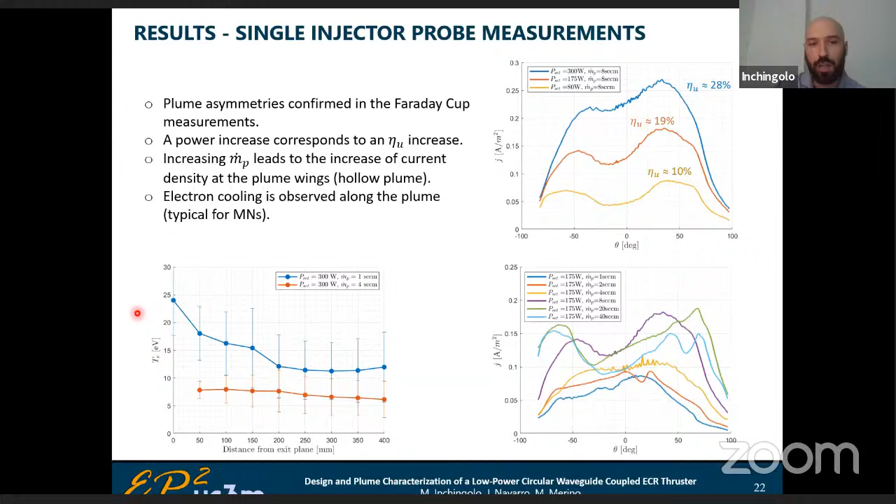Langmuir probe measurements were also performed, and we were able to reach a temperature of 25 electron volts, which is quite in line with what we can find in the literature for ECR thrusters, but usually for a lower power. Here we were working at 300 watts.

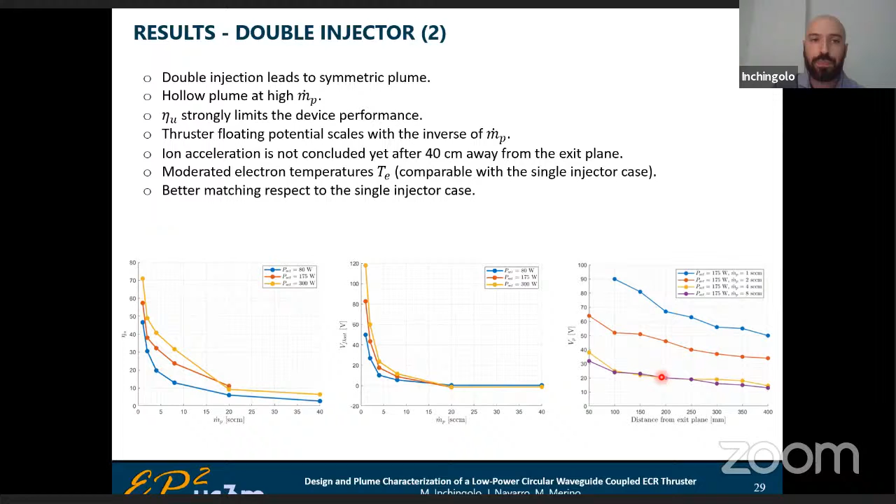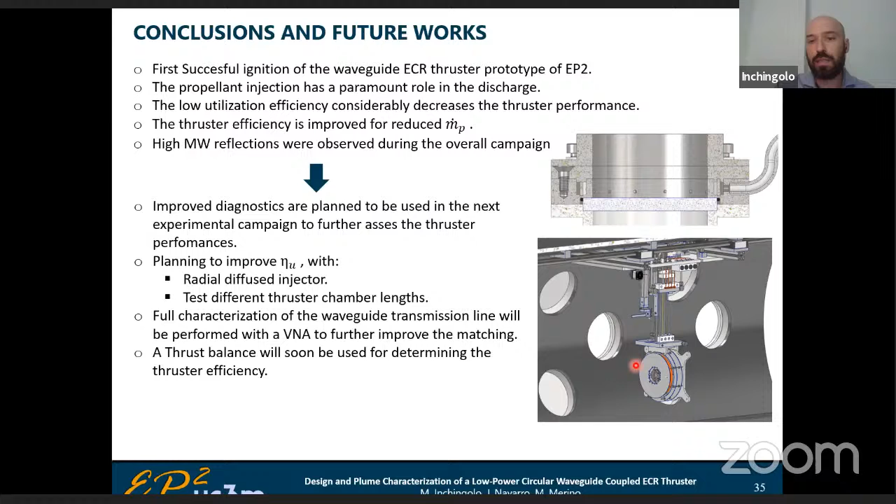Furthermore, we are going to use other diagnostics like a thrust balance and an RPA. So thank you. If you have any questions or comments, please don't hesitate.

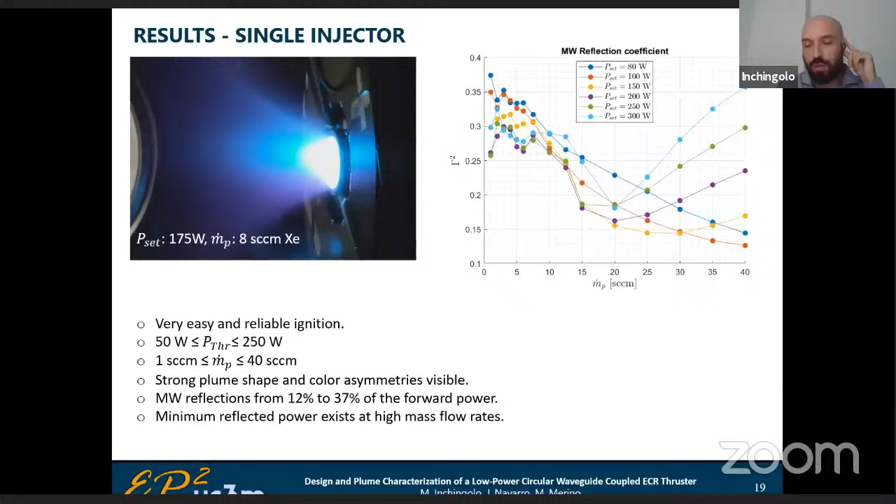Yes, you are perfectly right, but oppositely, to check how the reflections vary with mass flow rate and power, we were not using the matching network in this campaign. We tried to use it in a couple of tests, and we managed to match, but for some other cases the thruster was behaving not nominally and could not be kept ignited for some period. So there are still some tests that have to be done to use this matching network efficiently. We didn't use it in this case.

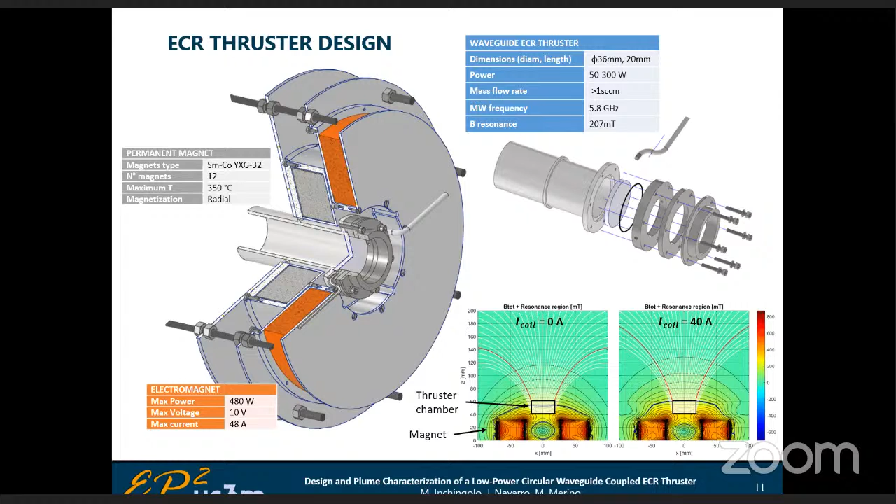Okay, so we didn't have any measurement of the ion energy, but I can give you some information. First of all, when we are changing the current in the coil, we are not only affecting the magnetic field topology, but also the resonance position. So this is something that needs to be taken into account. We can actually test some configurations with a very similar magnetic ECR resonance position by displacing the distance between the magnet and the coil, but we didn't do it in this campaign, and it could be done in the future. In this way, we can just alter the magnetic field topology and not the resonance position.

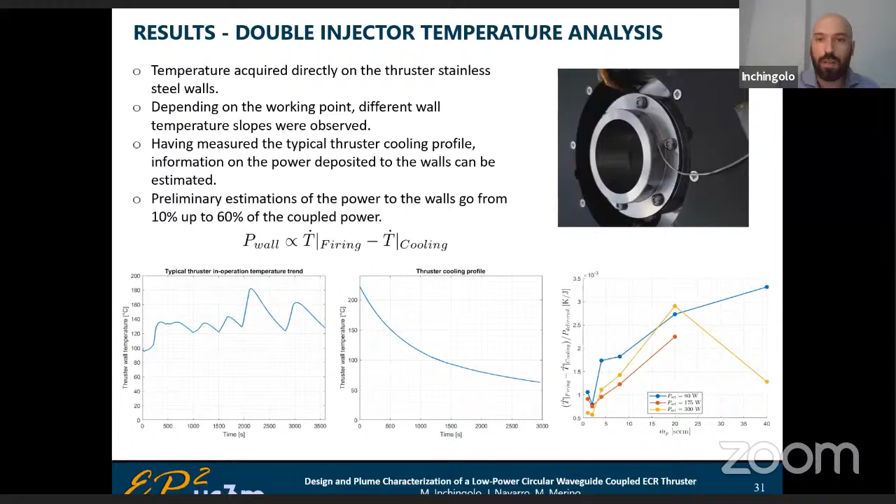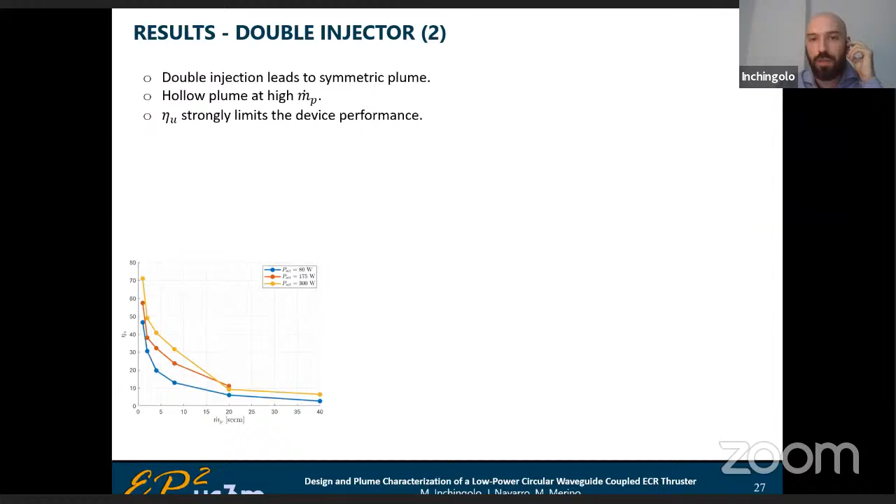I just have a quick question before we go for lunch, about the window for transmission of the wave. You mean the interface between the chamber and the... Okay. In here, but you will anyway have to inject into your cavity, right? So you will probably use a window even with the next version to separate the ECR cavity and the waveguide.

And what about the material that you use? Okay, for this window, we use quartz, because it's the best material to be used for microwaves. It has the lowest absorption that you can find. Yes, so this is what we used. And at the moment, we haven't tried to use other thicknesses.

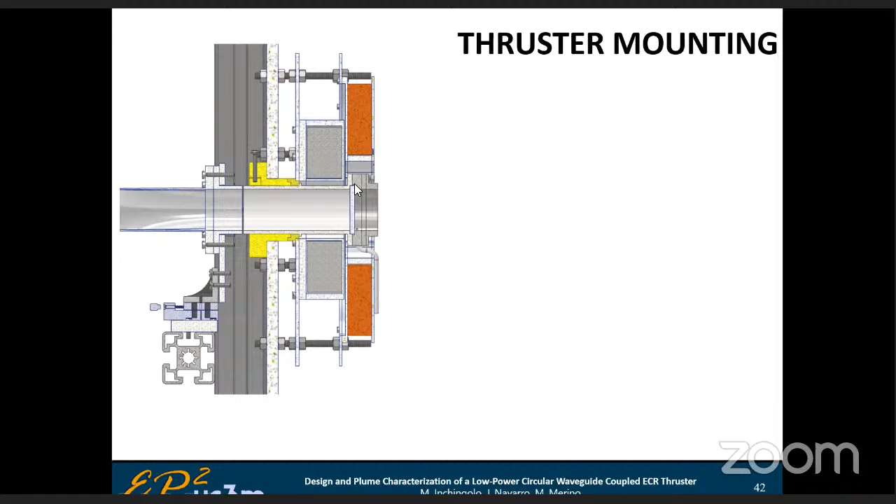And to switch off your microphone. No, but I can do it. We didn't try other thicknesses, but we wanted to be safe because it can be subject to high heat fluxes, so we didn't want it to break. So for the moment, we kept, if I remember correctly, it's 4 millimeters, but we might change it in future. So this is the first iteration. We will necessarily alter some dimensions and other parameters in the next designs.

And the cavity is fully metallic, right? So this here - all these components in dark gray are in stainless steel, and this is in aluminum. This is quartz, and we have an FFKM O-ring inside this little hole.